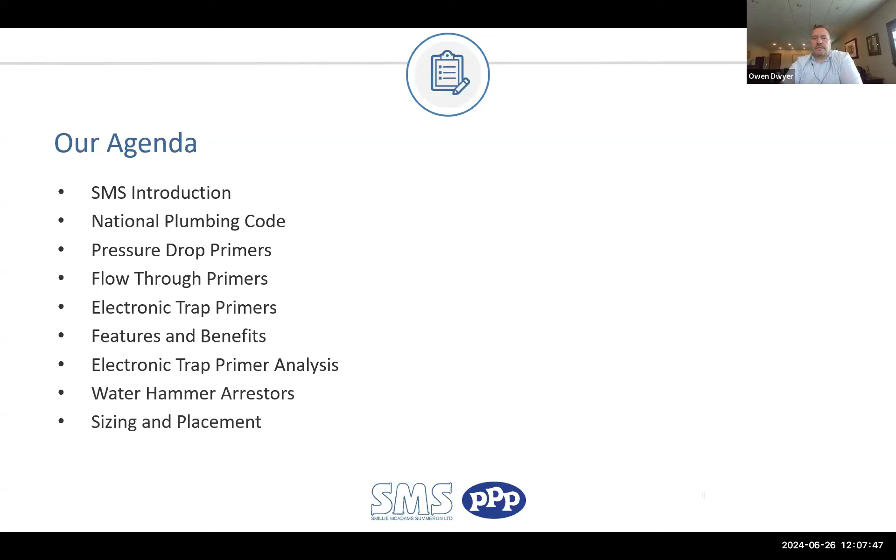All right, so we've talked about the introduction of what SMS does. It's going to be in reference to the national code, because not only do we have people here from Ontario, I'm assuming, Zach, this was opened up to all of your ATS members across the country. So everything is verbatim that I'm talking to. The only difference in references would be Part 7 versus Part 2 in the national. We're going to talk pressure drop, flow through, and electronic trap primers. Quick overview and touching on some of the features and benefits of each. We're going to do an analysis, mainly trying to focus on electronic trap primers versus the older technologies. And then we're going to get into water hammer arrestors, sizing and placement as per PDI recommendations and industry practice, and then a quick summary.

So I won't go too much into SMS. We're unique in the sense that we're set up nationally across Canada with respect to responsibilities for specific manufacturers, IPEX, SHOT, PPP, etc. So we have a unique approach in our market. It's not necessarily commodities, it's focused on ICI, institutional, commercial, and laboratory type of projects.

A quick line card shot. Again, you can see on the left-hand side is predominantly corrosive waste. We do the PPP across Canada, as well as identification systems, valve tagging, access doors, stainless steel drains for food and beverage, dairy, brewery, and as well as modular seals for below grade or sound vibration isolation, etc.

So what does our code say with respect to trap primers? As I mentioned, in the national code it's 2.4.5.5 1). In our provincial code here, it's part 2, part 7. It states: a provision shall be made for maintaining the trap seal of a floor drain by A, the use of a trap seal primer, B, using the drain as a receptacle for an indirectly connected drinking fountain, or C, other equally effective means. On the right-hand side you can see 2.4.5.5 1) - it's verbatim in Ontario.

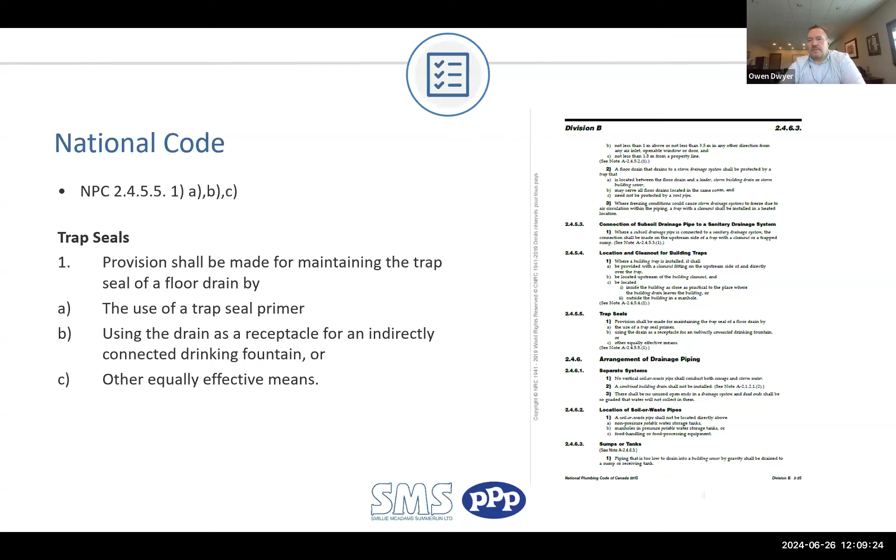So products: you have pressure drop primers, you have electronic trap primers, you have flow-through primers, and other equally effective means. You can see there's the vegetable oil - I'll talk about the vegetable oil in a minute, of which the latter, equally effective means, I'm not a fan of, but we can discuss that.

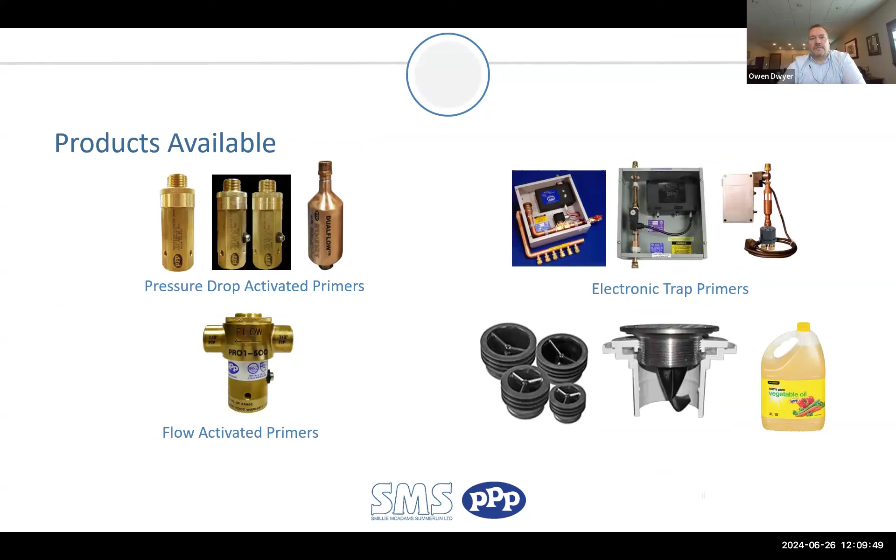I'll just tell you what that is in this next slide. So what are equally effective means? Let's address that first off. You have a trap - so to maintain the trap seal.

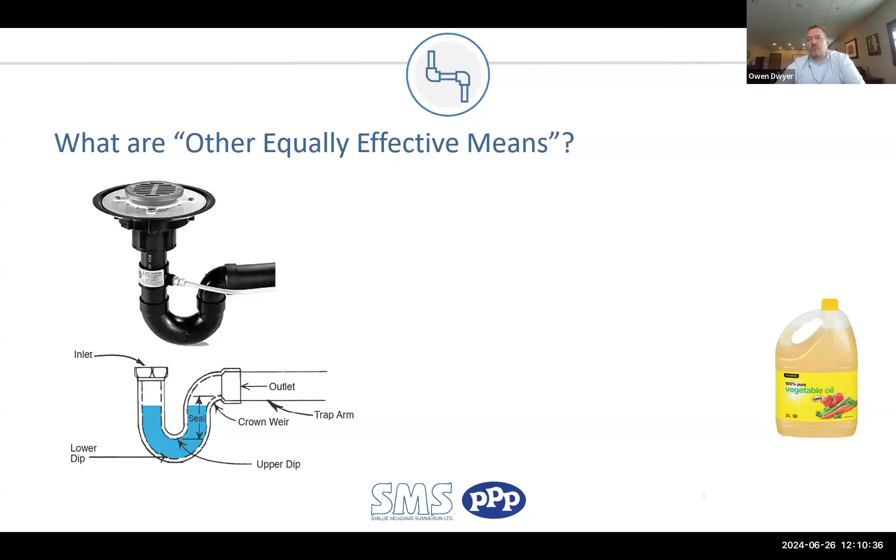As we know, a P-trap, the purpose of a P-trap is to prevent gases, noxious gases from your sewer coming back into the occupied space. And that's done by way of a trap. You have your top crown, your trap arm, and that water - you can see that seal in that image there on the bottom left. That is your trap seal. It is a water seal that's preventing the sewer gases from coming back into the occupied space.

So these devices, as we're all familiar with, you have multiple manufacturers that offer these insert-type seal products. If we're going to be specifying those as a means of trap seal priming or trap sealing, why don't we just eliminate the P-trap altogether? Because we can't - as part of our code, we need the P-trap.

And the reason the P-trap is there, on the bottom left side, is to create a trap of liquid water seal. I don't know if you may know, sometimes in school boards or other facilities where they have a drain that is out in the back 40 somewhere that's very rarely used - that's the old plumber's trick, to pour vegetable oil down the drain, because it's not toxic but at the same time it doesn't have the same rate of evaporation as water. So they would go back, and if they have a stinky drain issue, they just throw some vegetable oil down the drain, and it buys them some time.

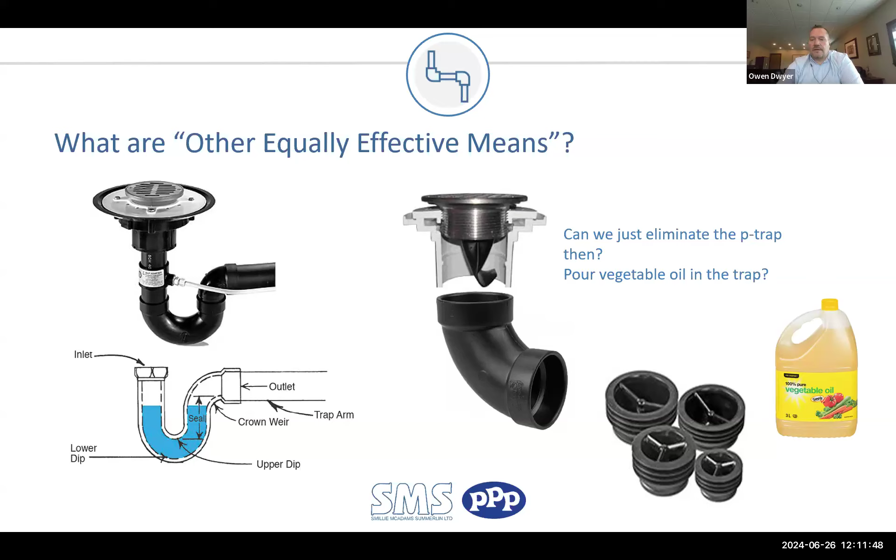So let's talk about the devices first. Pressure drop primers - a pressure drop primer needs exactly that, it needs either a 3 or 10 psi pressure drop in line pressure. Different manufacturers offer as low as 3 psi, I haven't seen anything lower than 3 psi. But when they first came out in the industry, 10 psi was the norm. They've become a little bit more sensitive to that 3 psi pressure drop mark over the years.

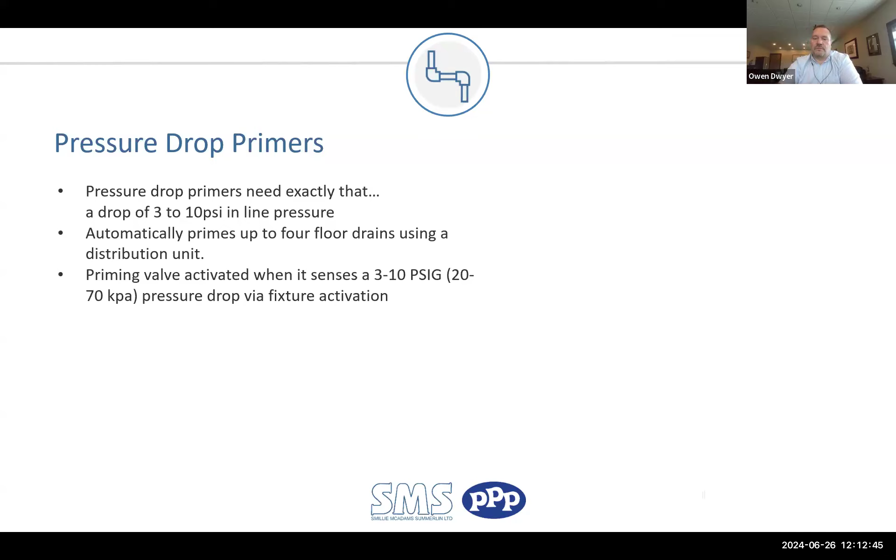Essentially what they do is automatically prime either 1 or up to 4 floor drains using a distribution cup on the bottom. So when it's activated and it senses that 3 to 10 psi pressure drop, it releases a bit of water - sometimes drips, sometimes a solid stream, during that duration of pressure change within that range of 3 to 10 psi. Essentially a valve operates between that 20 to 80 psi range, and typically there's no springs or diaphragms or plastic parts.

They look like this - again, this is a PPP image, but MIFAB, Sioux Chief, there's a whole bunch of manufacturers that look almost identical to that. And their typical installation is depicted there. That comes with most of those devices.

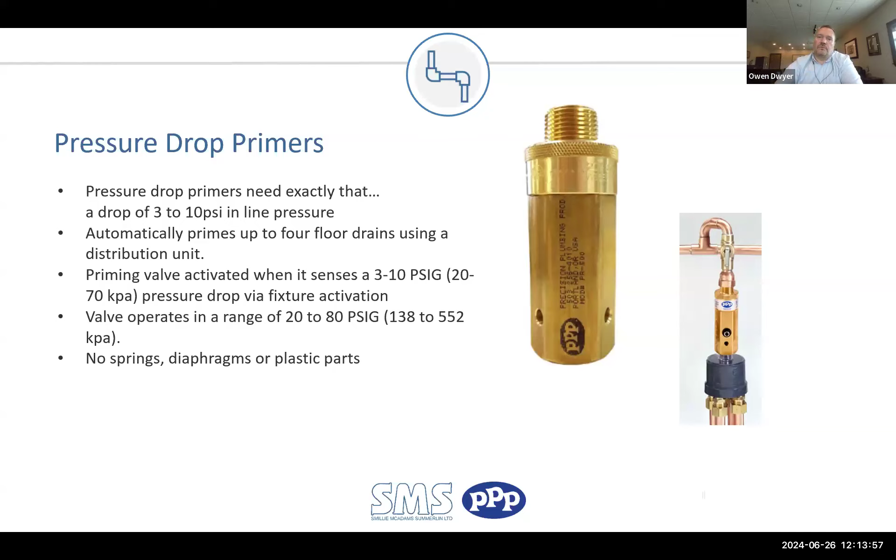That debris loop is an important part of the proper installation of these pressure drop primers. What that's doing is taking off the top of the supply line and 90ing down to a valve. Why? Because the top of that pressure drop primer is a very small orifice that can easily be plugged with any type of debris, something dislodged in the system, be it a buildup of mineral, solder, whatever's floating around in that piping system. If your takeoff is below, it's more apt to become an issue versus taking it off the top.

Just a quick question as we continue on through pressure drop. One thing you mentioned, the 3 to 10 psi drop, the primer is working only during that drop, right? It's not like that drop triggers a set amount of time, correct? Correct. If your static line pressure is 70 psi and an adjacent fixture activates, be it a flush valve and whatnot, as long as, depending on which device is installed, if it goes from 70 to 67 or below, it will activate during that drop in pressure. Same thing for the 10, but the 10 would need to go from 70 to 60 or below to activate properly.

So this is the typical installation as I showed in that picture. You have your device, which is kind of like a piston style, and I don't know what magic happens, but my understanding is there's an O-ring in there that has a seal, and that seal is set to withstand a certain amount of differential pressure between the set line pressure side and the atmospheric side. It basically trickles water past it at that setting. So to get to the 3 psi, think of the analogy of making that gasket or O-ring seal a little thinner versus the 10 psi, which would be a little more robust of an O-ring.

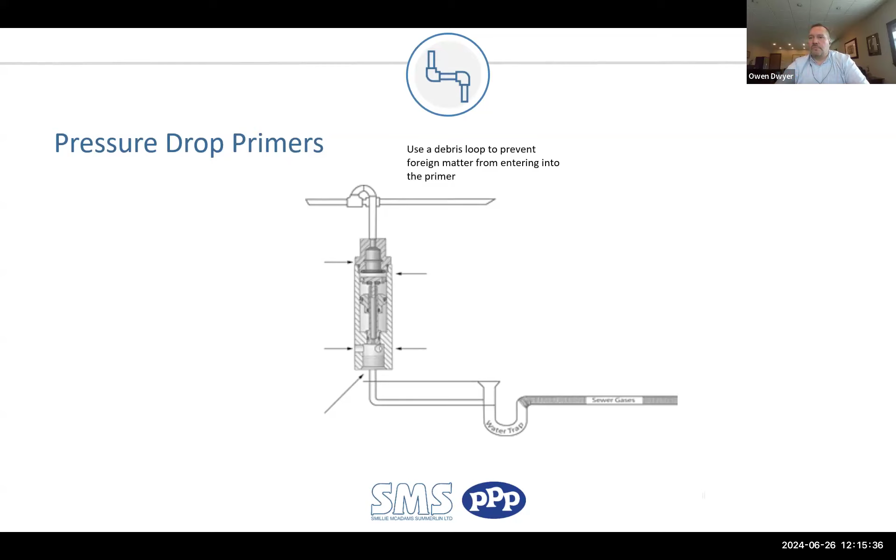So you have your cold water supply, you've got your check valve seal, your vacuum breaker ports, which we'll talk about shortly.

A note worth pointing out here is that the minimum code requirement or manufacturer's recommendation is an elevation of a minimum of 12 inches above the finished floor. You want enough gravity flow to your drain. It can't be right on the floor — there's just not enough head pressure, if you will, to drive that prescribed dosage of water coming out of that unit to reach the drain. Typically, for every 12 inches of elevation above finished floor, you get 20 linear feet of primer piping. So if your drain is 30 feet away, you might want to put that trap primer a minimum of 36 inches... what did I say, 30 feet? So you'd have it 2 feet, 24 inches above your finished grade.

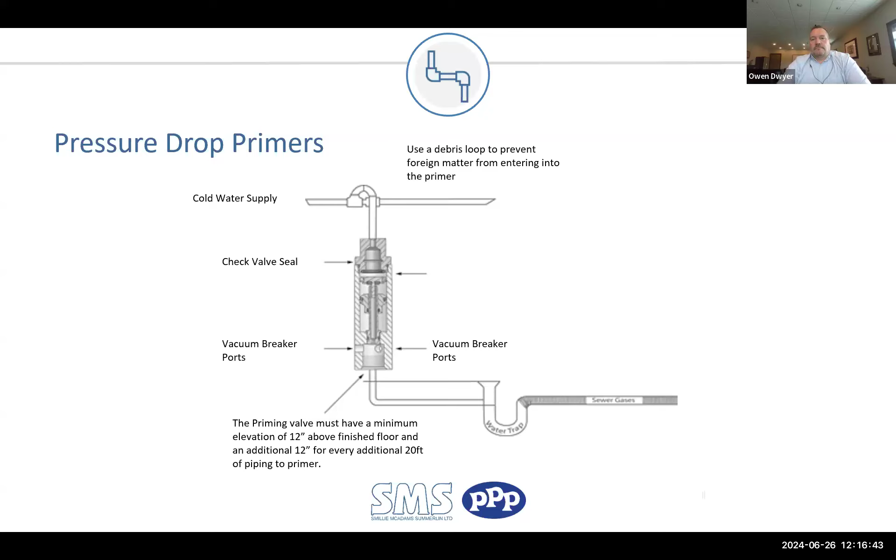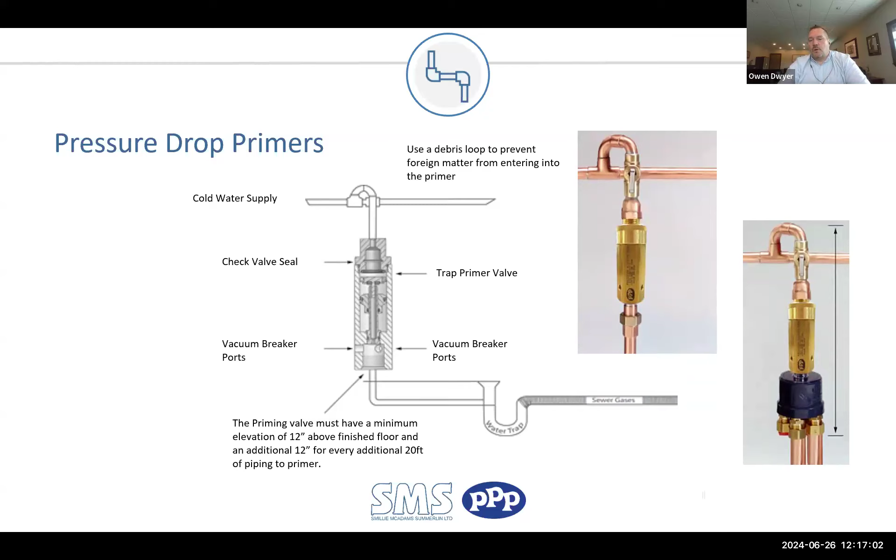Vacuum breaker ports we talked about, and that's the actual priming valve itself that we can see. I'll talk about this installation with or without the distribution cup shortly. As a standalone, without the distribution cup, it's priming one drain. With the distribution cup, you're able to spread that water flow throughout multiple drains.

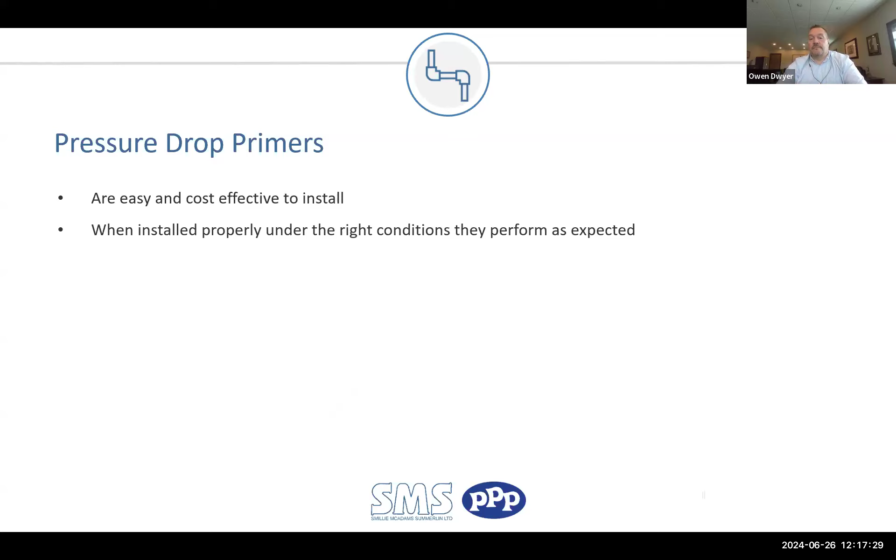Just a quick rundown of advantages: pressure drop primers are easy and cost effective to install. They've been around for a long time, and when installed properly under the right conditions, they perform as expected. There are perfect applications for them, and we'll go through that shortly. But when installed properly under the right conditions, they perform as expected. They can do up to 4 drains, as I mentioned.

However, they are not suitable for low flow fixture or booster pump scenarios because of that 3 to 10 psi pressure range. If it's not seeing a sustained pressure drop for that period of time, it might get down to 3 or 10 psi below static line pressure, but a booster pump kicks in 5 seconds later, and you don't have enough of that sustained pressure drop for the device to activate. So it's not a fault of the device.

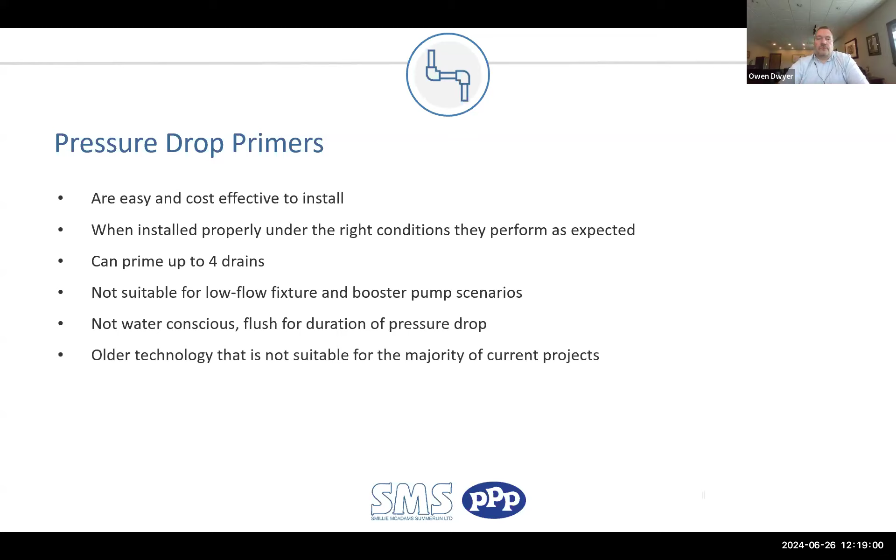They are older technology. Typically, flushing fixtures in the past were not as water conscious as they are today. So based on our water consciousness and today's devices, sometimes these pressure drop primers are not the right choice as a priming device. They're not water conscious, so basically they flush for the duration of that pressure drop. If you have a facility with a lot of usage of those fixture groups — toilets, urinals, labs, etc. — you've already replenished the evaporated water in your P-trap, and everything else is basically water down the drain, if you will. So again, they're older technology that isn't suitable for the majority of current projects, and we'll explain that a little further.

Quick question coming in here - a bit of a unique application, I think. They're wondering whether this could be used in a trench drain area, specifically installed at the high end of a trench drain and activated by the pressure drop at the inlet to the sewer piping.

I would say not a pressure drop primer, because of the amount of prescribed water. If you look at the details from any manufacturer, it's small amounts, in ounces. So if you want to make sure your trench drain is flushed, you might want to go with electronic, which could be set on a prescribed flushing cycle depending on the amount of debris that needs to be flushed down that trench. I would not use a pressure drop primer because there's just not enough flow.

I would think something like an electronic, or even just a solenoid with a DCW, would work a little bit better. Some variation of that is probably more akin to what you're looking for in that application.

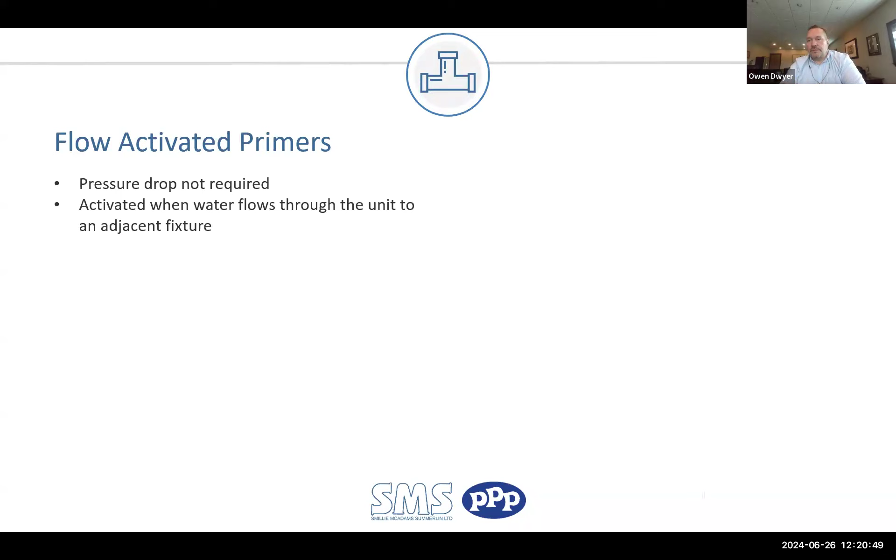It will emit fresh water as long as that fixture is in use. In a school application, if the cold water is left on in that sink, not only do you have it going down the sink, but it'll continuously run in the floor drain as well. Same thing if you have a flush valve that sticks open - not only is it being wasted down the faucet drain, it's also being wasted down that floor drain. So as long as that fixture has cold water flow through it, it will continue to have flow through that primer device.

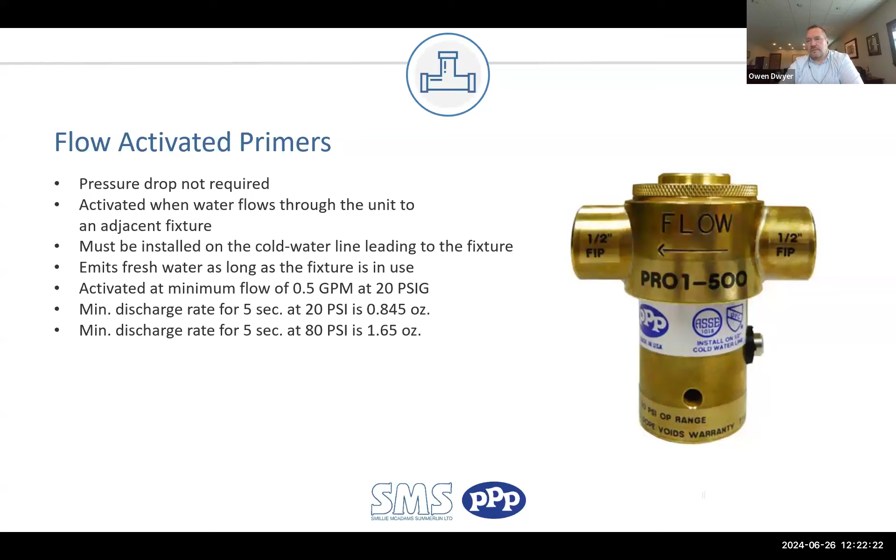They have minimum discharge rates - 5 seconds at 20 psi for 0.845 ounces. So you can see how small a volume of water goes through them for a 5-second cold water activation. And at 80 psi, it's 1.65 ounces. Similar to the previous question about flushing a trench drain, there's just not enough water for 5 seconds of flow being pushed through it - you're only going to get 1.65 ounces of fluid.

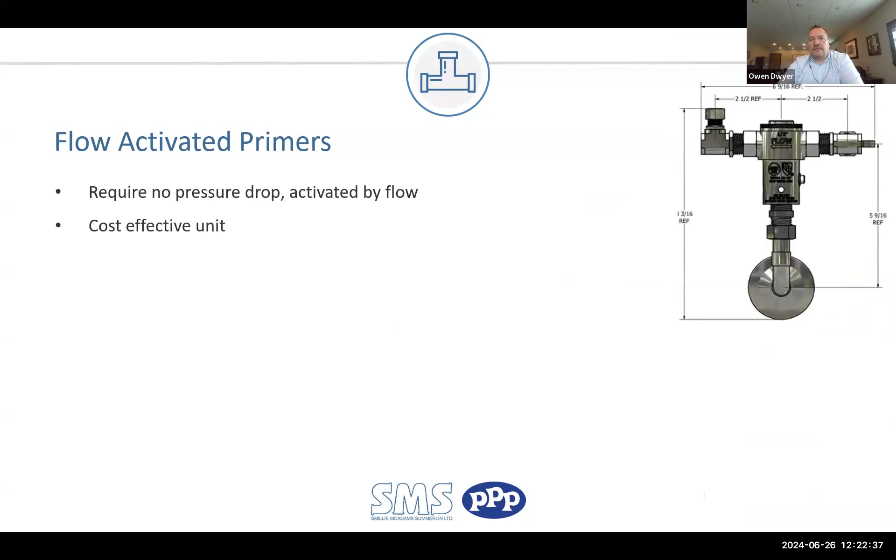As a recap, these aren't rocket science. They don't require pressure drop - they are activated by flow. They are quite cost effective, a little bit more money than the pressure drop primers, but they're not water conscious. Sometimes you can get them in chrome. They can go right underneath the lav in an accessible cabinet area, but that's essentially their use - they're activated every time a fixture downstream of that faucet is used.

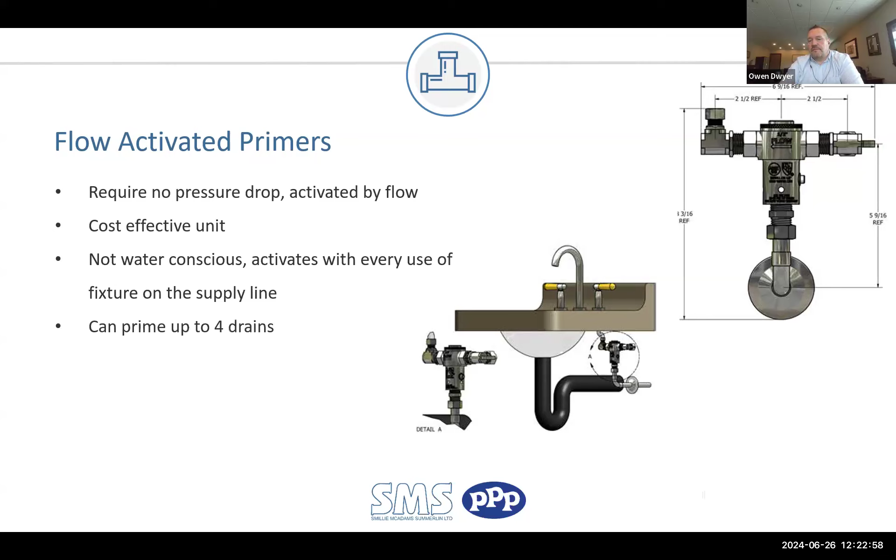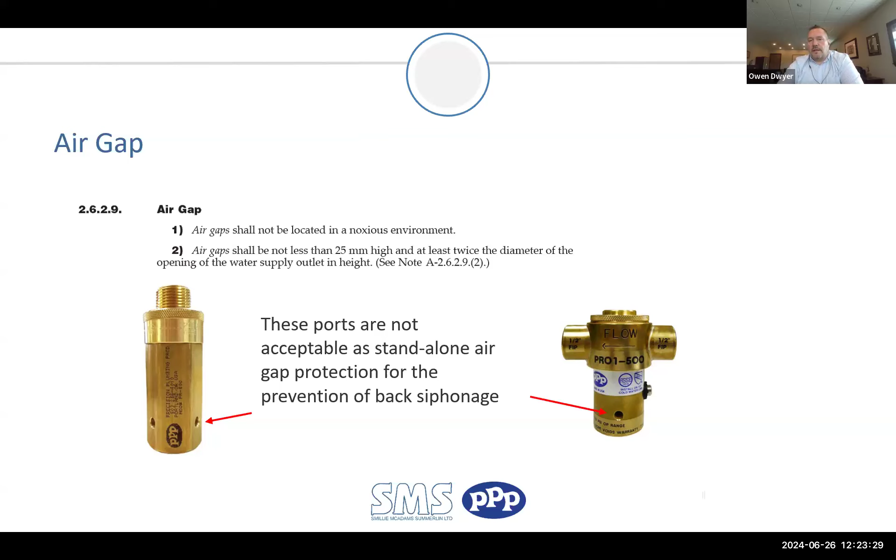So this is going to be talking about back siphonage, and I added this to the presentation I originally submitted because it's important to note that the air gaps provided, or the air holes in Canada, are not a permissible form of back siphonage prevention. These ports are not acceptable as a standalone air gap per our code requirements, so you would have to have an air gap device in conjunction. Sorry, the image is upside down there, my apologies.

So I don't know if that's new news, but just so everyone is aware, that pressure drop primer or flow-through primer, whenever you see those little ports on the side, they are intended for back siphonage prevention, but they are not code compliant for back siphonage prevention. They do not fit the definition of an air gap as far as back siphonage.

So going on to the third, so we covered. One quick question there: is that something that's commonly an option on one of those flow activated or pressure drop activated trap seal primers? Or is that something that a contractor is going to get from, say, the pipe manufacturer or something like that?

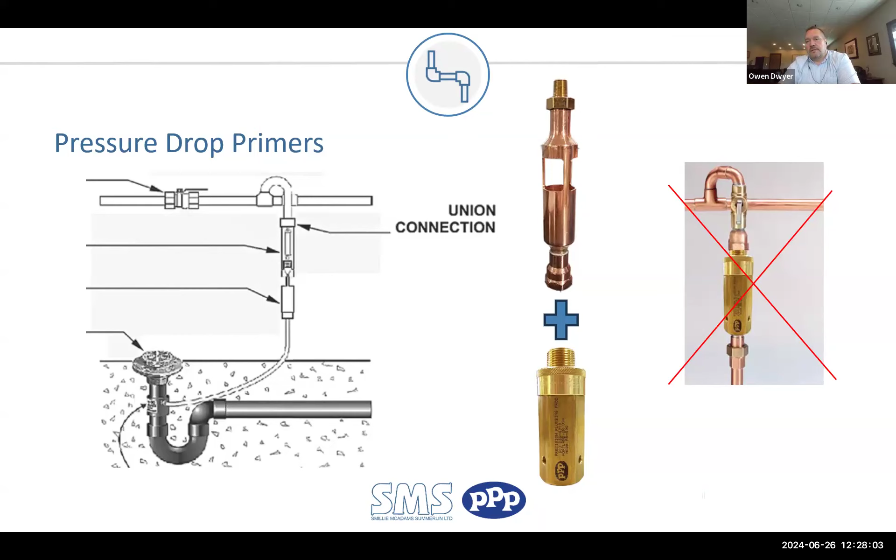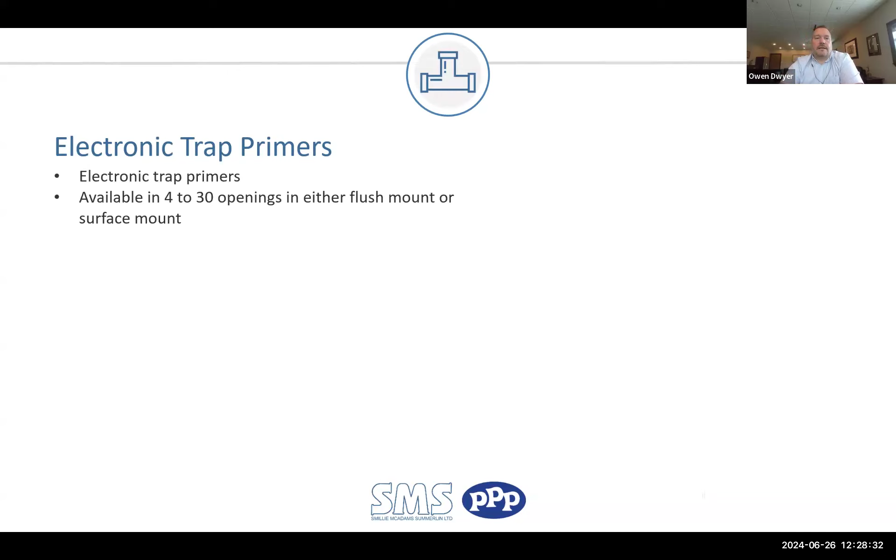So moving on into electronic trap primers. Electronic trap primers are exactly that. They use power, be it 120 volt, 12 volt, or 24 VAC. They can do up to multiple drains, up to 4 to 30 is typical. I have never seen a manufacturer do more than 30, either surface mounted on the wall or recessed into the wall.

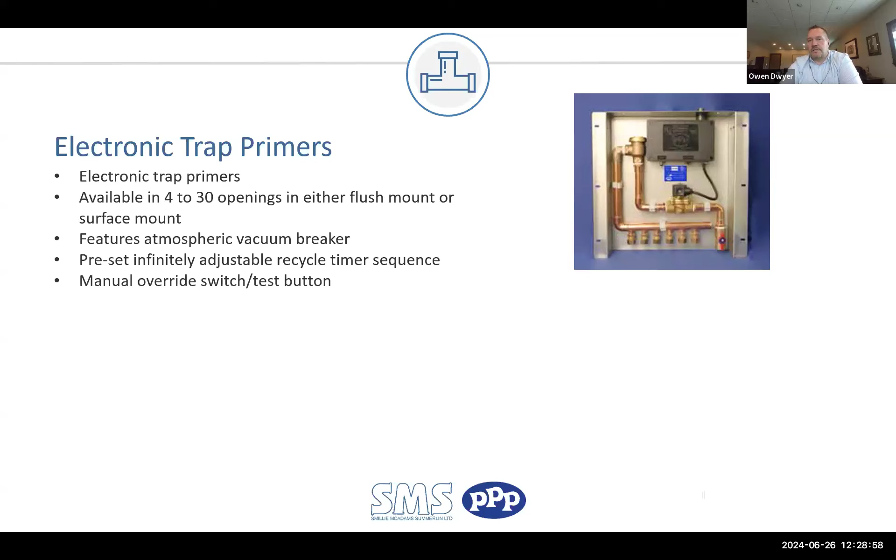All of them feature an atmospheric vacuum breaker, which we'll touch on shortly. A preset, infinitely adjustable recycle timer is what you're looking for. Not all electronic trap primers are created equal. They should have a manual override or a test button just to make sure that the device and the solenoid are acting properly. Again, as I mentioned, various voltage, whether it's 120, 220, whether you have a battery operated unit at 12 volts or a BAS system that's operating at 24 VAC.

They are calibrated manifolds. So typically you have water that's coming in and it's not a full port, because your first drain is going to see the predominant volume flow, second drain less, third drain even less, et cetera. So these manifolds are calibrated, they're not full port. If you ever tip one of those manifolds upside down and looked in, they have an orifice inside the outlet to accommodate an equal flow distribution through those manifolds.

Typical outlets are either 5/8 or half-inch compression. That would be the difference between either a rigid copper, soft copper, or poly tubing on the half-inch OD compression, which is typically 3/8 tubing. So before I get to the next point, there's also now, because of popular demand, half-inch PEX and half-inch PEX F1960 or Pro PEX connections in lieu of the half-inch or 5/8 compression.

Pricing typically doesn't change. It's just a matter of the contractor ordering at that time what the connection type is.

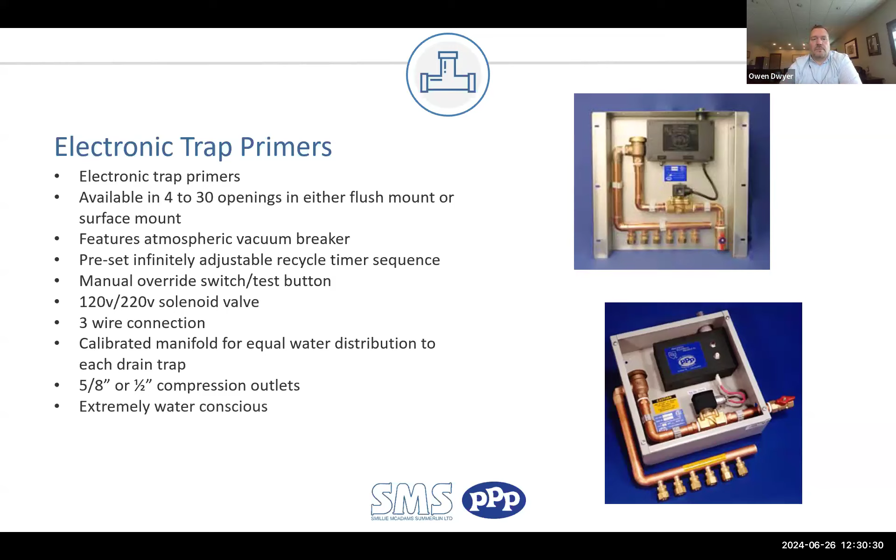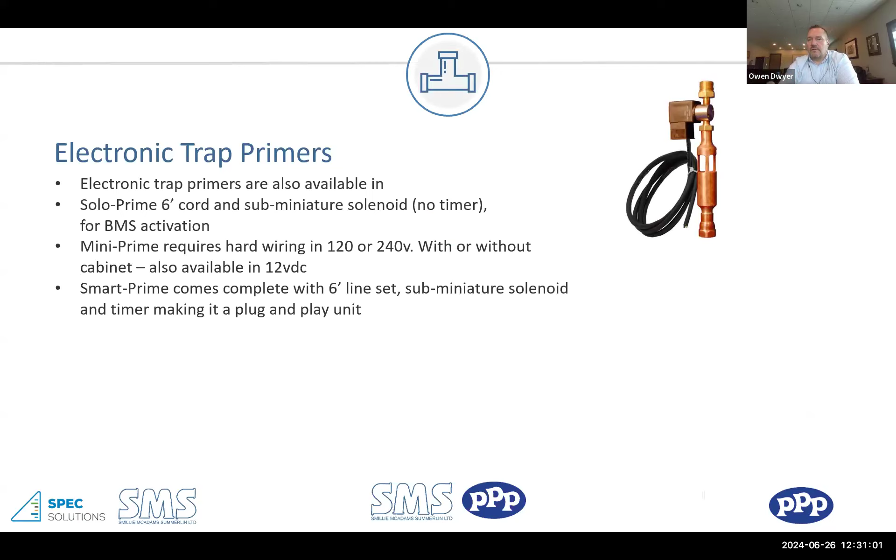Electronic trap primers are extremely water conscious. We'll go through that in detail shortly. Electronic trap primers are also available, again these are trade names from PPP, but other manufacturers have similar ones. So instead of a cabinet, these are kind of like plug and play or hardwired units. Some have no timers and require activation through a BAS. So there are multiple variations of electronic trap primers, some with little sub-miniature solenoids, and some requiring BAS activation, with or without boxes and cabinets, etc.

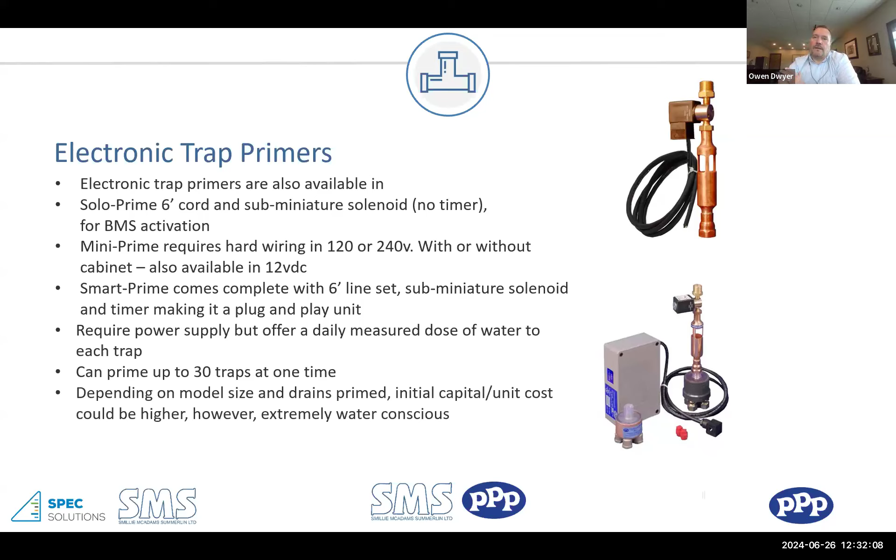These can do up to 30 drains in one prescribed dosage or activation. Depending on model size and number of drains primed, the initial capital cost looks higher because you've got more bells and whistles, solenoids, electronic components, etc. But in the end, extreme water conservation is key for these units.

So just a little preamble on this - I'm making a joke here. This is a highly scientific pressure drop to electronic trap primer comparison.

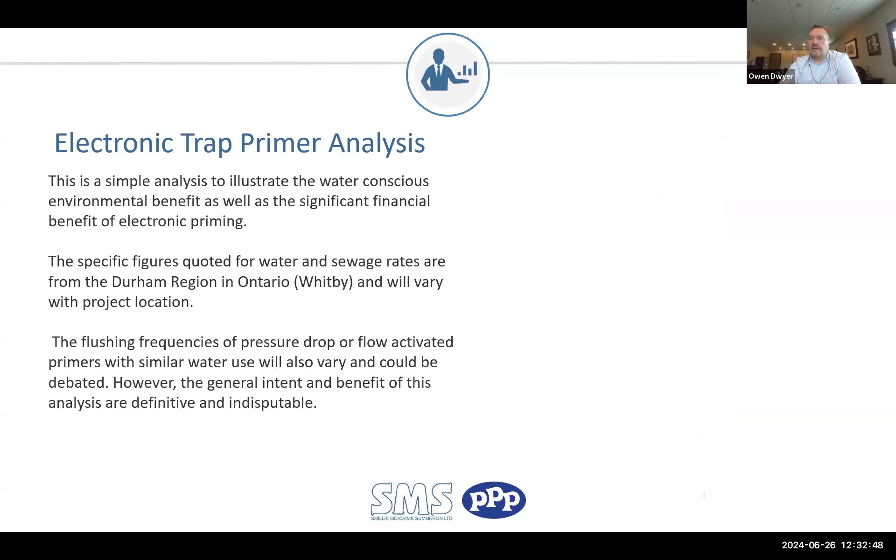So what we did: we took a scenario using our region of Durham, where our office is in Ontario. We took our bulk water consumption rates and the flushing frequency of a pressure drop or flow activated primer with similar use. The general intent is just to illustrate the benefits of an electronic trap primer over pressure drop or flow through.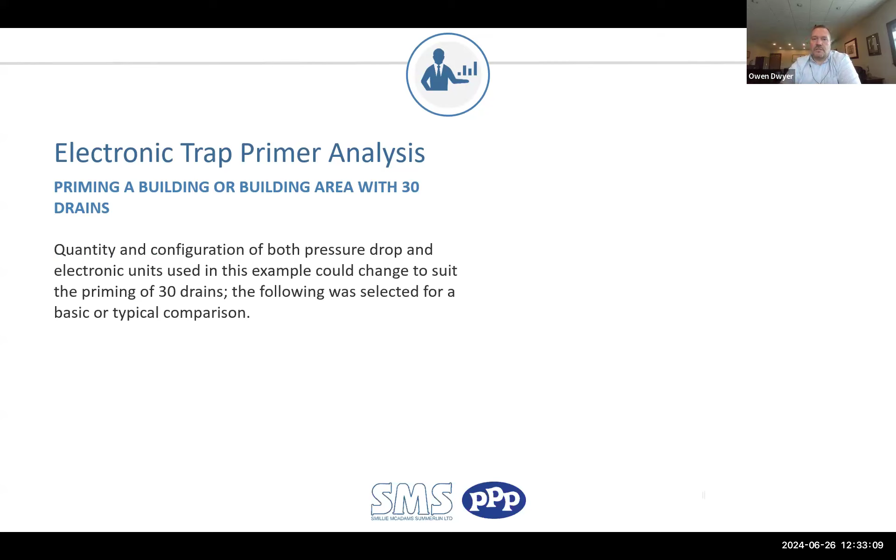So in general, we have a building that requires priming of 30 drains. The quantity and configuration of both pressure drop and electronic primers were selected to suit that scenario. Just take a plan - here's where your drains are for a basic typical comparison.

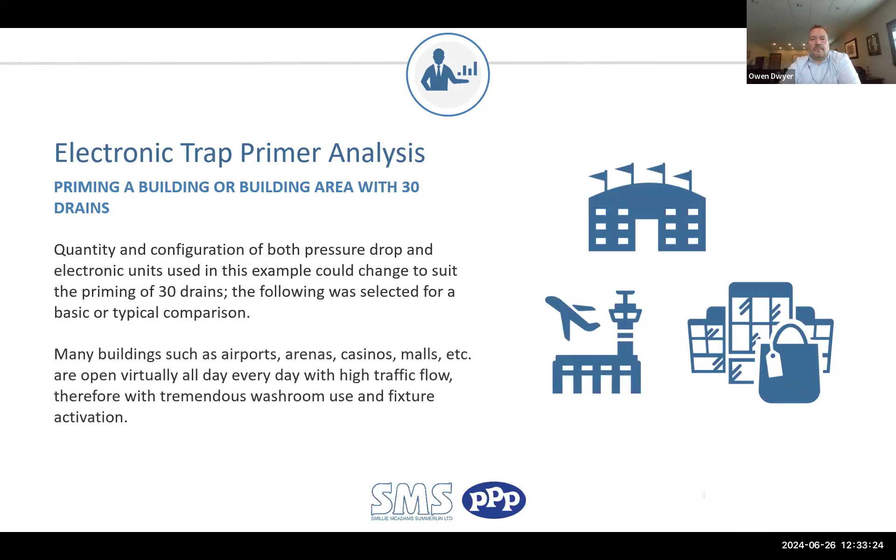So in that, we're going to take a high volume of flow. We're going to take airports, an arena, a casino, a mall - somewhere with high fixture usage, and basically tremendous washroom usage and activation.

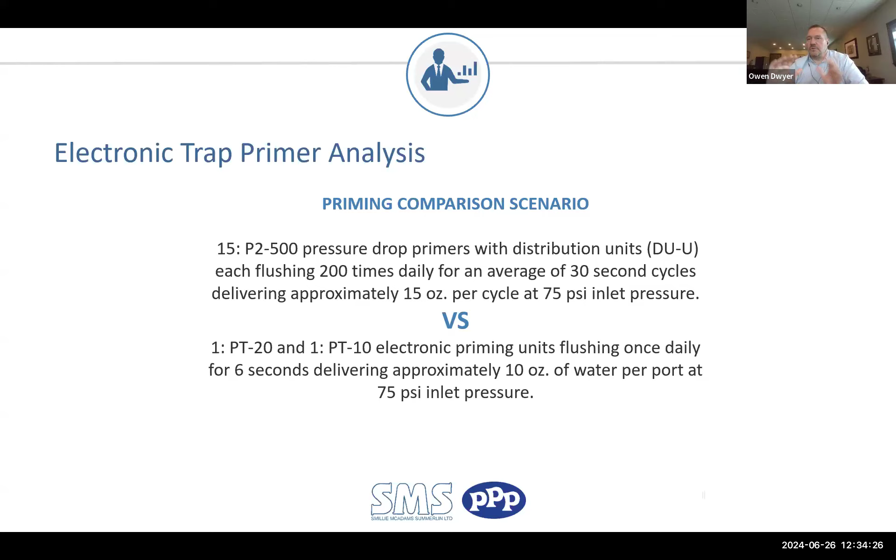Versus electronic - now we've selected one 20-outlet station and one 10-outlet station in different parts of the building to accommodate those 30 drains. These are electronically activated solenoids with factory settings, typically 6 seconds to deliver approximately 10 ounces of water per port at 75 psi. So again, all parameters equal.

When you start to look at your water consumption, this is where the eyes should get opened. So 15 pressure drop primers that deliver 15 ounces per cycle, 200 cycles per day, every day of the year - again, this is just picking an extreme type of scenario - that is 16,425,000 ounces, divided by 160 to get gallons, so about 102,000 gallons a year to prime floor drains. I know this is an extreme scenario, but it's just for visualization purposes.

So again, going back to our first block water rate usage here in Durham for cubic meters: for the first 1,000 gallons is $4.29, and the average sewer rate is $1.60 per cubic meter at first block rate. Annual sewer and water consumption for this facility would equate to about $1,200 in water usage for drains - essentially water down the drain to keep these trap primers functioning properly.

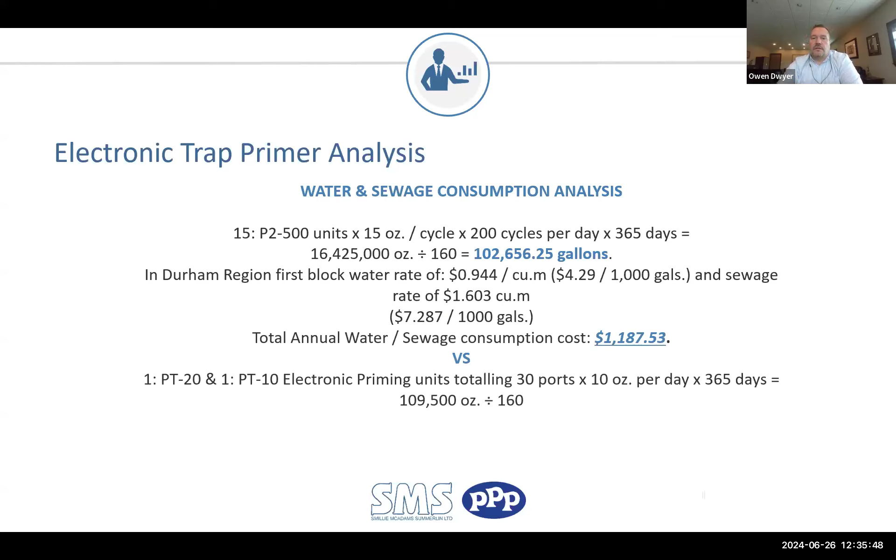Versus you have a 20 and a 10 electronic trap primer, 30 ports, 10 ounces per day, 365 days a year. You have 109,500 ounces divided by 160, giving you approximately 684 gallons per year. So its total annual water sewage consumption is $7.92. These have increased since I did these calculations a few years back.

But again, it's just a matter of visualizing the benefits of electronic trap primers over pressure drop, because every time there's a pressure drop, if they're installed in the right environment, every time there's a pressure drop or flow through, there's a prescribed amount of water. Whereas electronic is once a day for a set period of time. Again, just as a standalone cost comparison on water consumption, it's worth noting.

That volume always throws me for a loop - like the amount of water that goes into activating those flow through or pressure drop activated units, because it's every flush valve activation, right? Every time the flush valve drops the pressure enough to activate the pressure cycle. Correct, yeah, it's a wild amount of water. And I would imagine, since you put these calculations together, over the last handful of years those numbers are higher. Yeah, not those numbers are higher for sure. But again, the ratio would be the same.

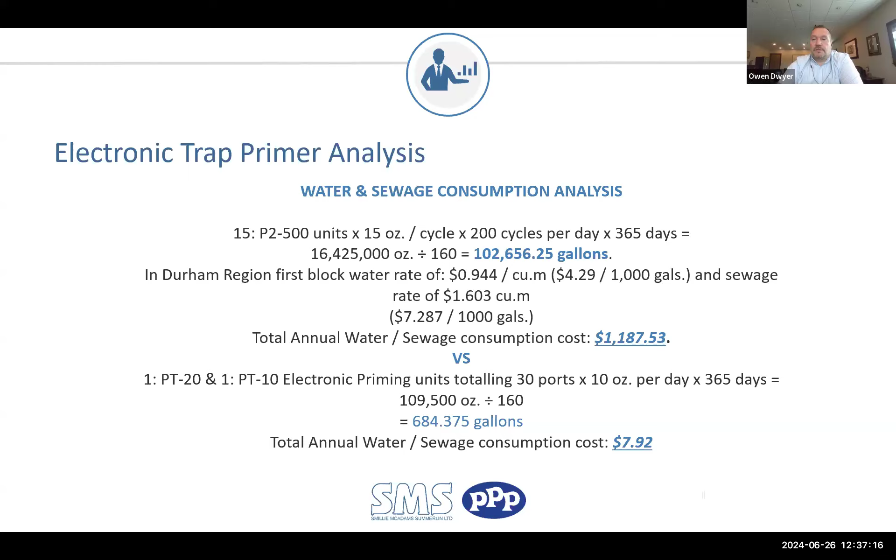So regardless of the cost of the water consumption, the ratio would be comparable. So just a quick capital approximate cost analysis. Again, these prices have changed, but again, it's for kind of analyzing if you're going to sit there and look at cost comparisons.

So 15 of those pressure drop primers, let's call it $965 for a wholesaler or contractor. Distribution units, you're going to need 15 of those as well. 15 labor units at $80, 2 hours per install because you're sweating in if you're doing it all properly. So you've got a total install cost of $3,852.

The cost of a PT10. So again, you have initial sticker shock from a lot of people, $1,100. It's going to take about 3 hours to install that. And then you've got a PT20, it's $1,309, and it's going to take approximately 4 hours to install that. And then you have to take into account the different trade for running the electrical.

And again, this is not something that we made up. We had a contractor do this analysis with us to give us some fair results. So as you can see, the installed cost for the material itself as well and the labor to install them, even if it was negligible, the cost and water savings should be the selling factor.

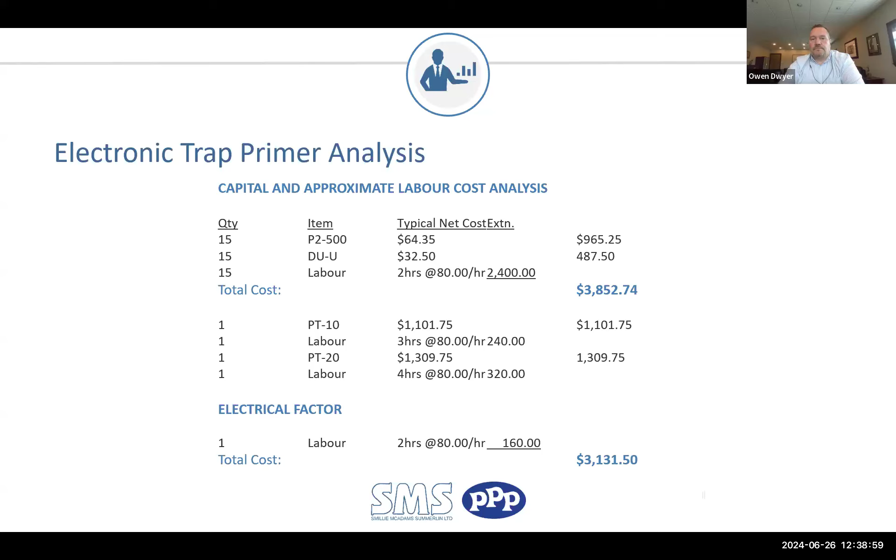But a lot of times there's people, they get a sticker shock because, okay, it's going to cost me $2,400 for these electronic units, but it's only going to cost me half of that for doing a pressure drop. But by the time you actually install them, it's cheaper to go electronic.

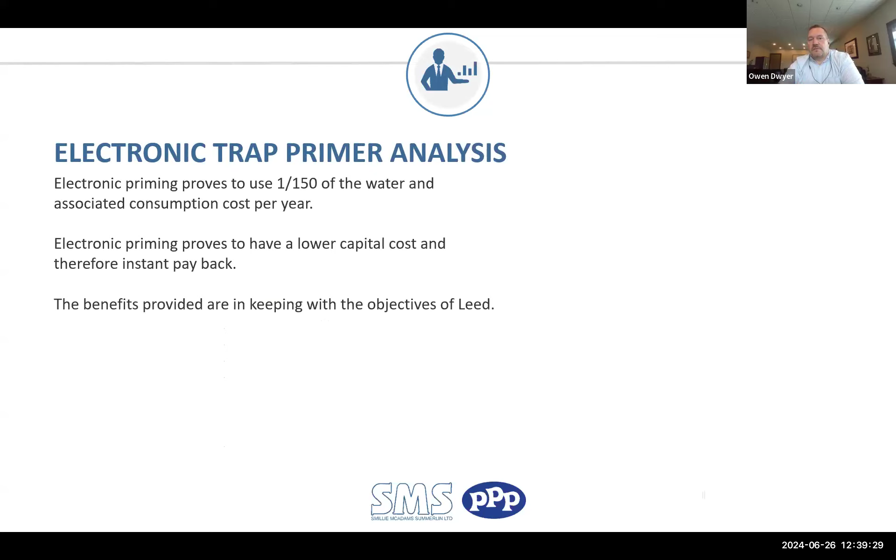So in our analysis, electronic priming proves to be 1/150th of the water and associated consumption costs per year. And electronic priming proves to be a lower overall capital cost and instant payback, even if those were a wash. And there is no instant payback. The payback is coming in the water conservation, the benefits of providing and keeping with the objectives of LEED.

And we recommend specifying electronic trap priming to the maximum extent possible for multiple factors. One, water conservation. Two, low flow. A lot of days today we have low flow faucets, low flow everything, and we're trying to conserve water. And then you have a facility that has not only low flow devices, but then they add booster pumps. So all of those factors work against flow activated, especially pressure drop primers.

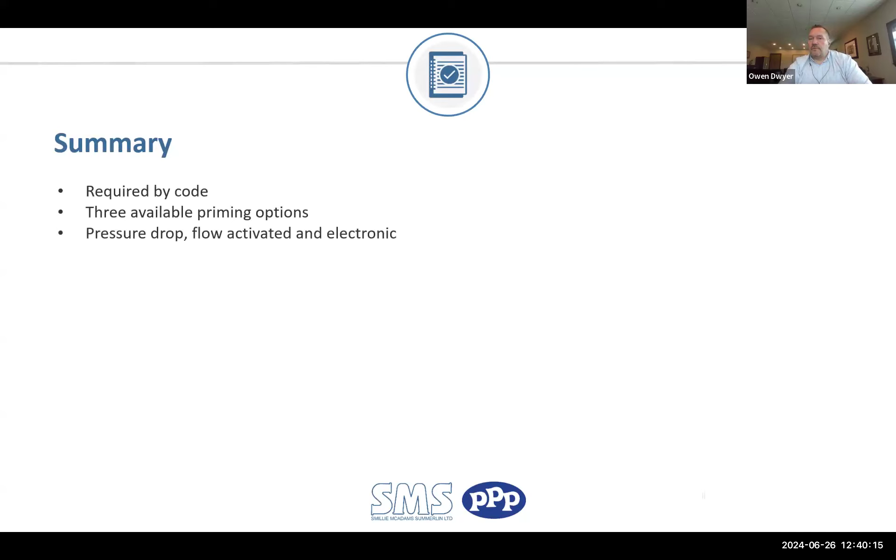So in summary, you have to seal that P-trap that's in the drain and that floor drain. You have three available options, either your pressure drop, flow activated, or electronic. It's good engineering practice that you shouldn't rely on other equally effective means, as I mentioned. No, you don't want to have somebody install that device and that device gets blocked or removed, or you don't want to have somebody going to put vegetable oil down the drain.

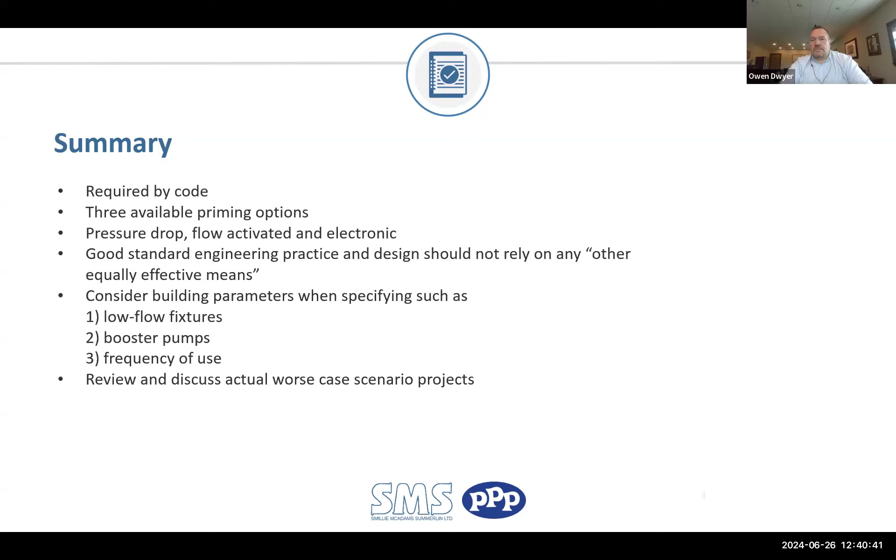Take into consideration your low flow, booster pumps, frequency of use, etc., and review and discuss actual worst case scenario projects like we just went through. So I'm going to jump into, and this was one of those kind of pay now or pay later scenarios. So a lot of times if a building owner is looking, wow, a contractor submitted this, it's going to cost me $1,200 to put in pressure drop primers. Why are we specifying electronic?

You could say, well, pay now or pay later. So what you're going to be doing is you're going to be paying quite a substantial amount more in your water and sewer consumption, Mr. Building Owner, going that route.

Yeah, and while you get over to that other part for the water hammer arrestors, a couple of questions coming in. Sure. One, I guess maybe you can comment briefly. I know we kind of talked about it in terms of low flow world and low flow fixtures affecting the choice of priming. Right. I would mention that historically there had been almost a direct connection to the vacuum breaker tube, so that when you flush the toilet, there would be an amount of water that's going down that tube and lead to your trap.

Right. With the low flow world and the fixtures that we're in, that sort of method worked okay when we were doing 3.5 gallons. When 1.6 gallons per flush was your low flow, that was okay. We had an allowable amount of water that we could divert and not affect the performance of the fixture.

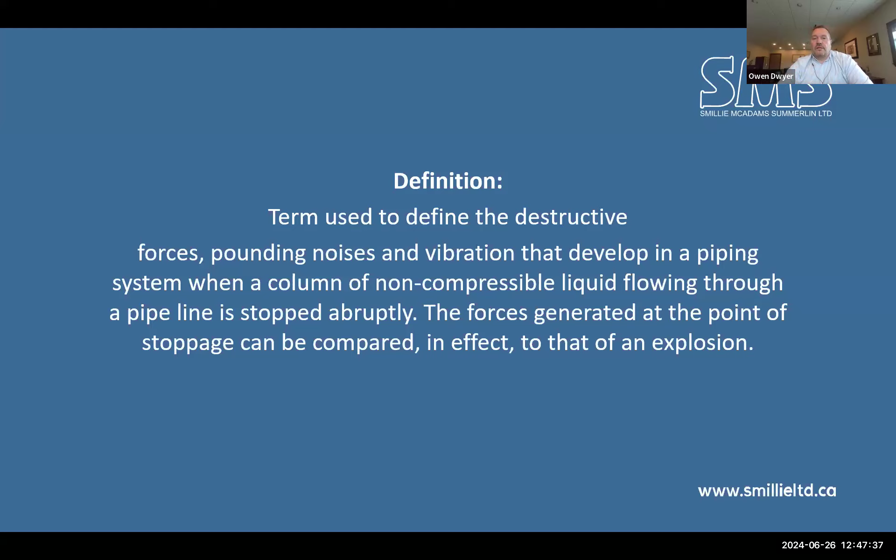So by definition, the term is used to define the destructive forces, pounding noises, vibration, anything that develops in a piping system where a column of non-compressible liquid is flowing through a pipeline and stopped abruptly. So how that happens is solenoids, opening and closing of valves, et cetera. So those forces have been known to generate upwards of explosive potentials. We're going to go through that a little bit, but the forces generated at the point of stoppage can be compared in effect, as I mentioned, to that of an explosion. So water hammer arrestors are needed for this reason.

Water hammer occurs when a high intensity pressure wave travels back through the piping system until it reaches the point of relief, such as a larger diameter of pipe, the riser, etc. That shock wave will then surge back and forth between those two pipe reliefs and the point of impact until that destructive energy has been dissipated or absorbed. That violent action accounts for the piping noise and vibration, and the faster the water flows through the system, the more intense that water hammer or that noise will be. So we're increasing the possibility of damage.

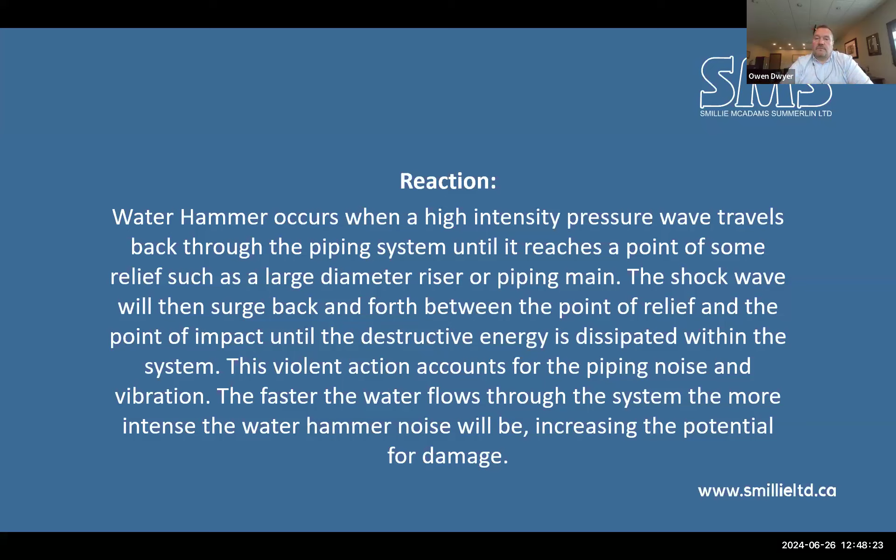So just a kind of line drawing of what's happening. So you have a closed system, water is static, opens abruptly, that water is now flowing, and then again it closes abruptly, and then you have that sudden shock. So that shock goes not only forward, but now you have it coming back on itself, and those two flow joints, that conjuncture, is where you get that energy.

So the absence of noise, it's important to note, does not indicate that the water hammer or that shock doesn't exist in that distribution system. Sometimes it's mitigated by the material of the water supply, like PEX piping, for example. If the piping has the ability to move, it might absorb that shock, whereas a more rigid piping system won't.

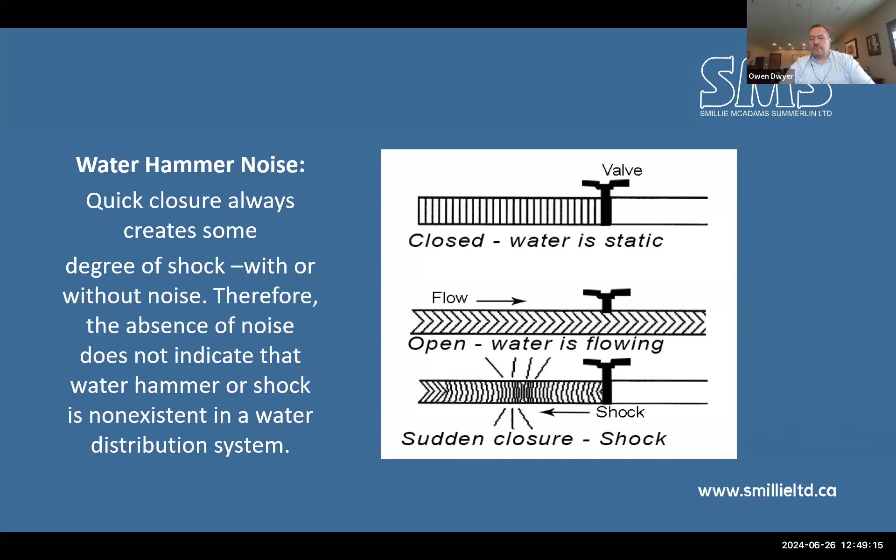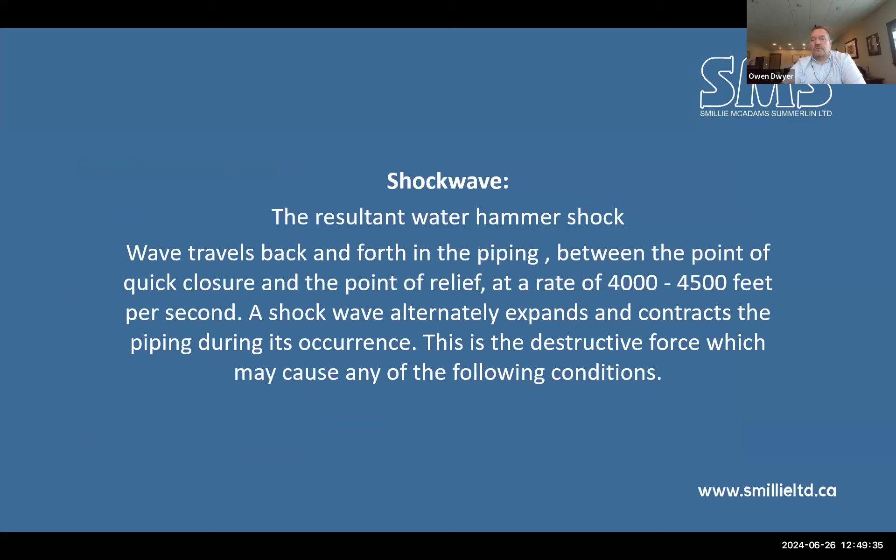So the resultant water hammer shock travels back and forth in the piping, as I mentioned, between the points of quick closure and the point of relief at a rate of 4,000 to 4,500 feet per second. So that shock wave alternately expands and contracts that piping during this occurrence, and that destructive force can cause the following conditions. Obviously, ruptured pipe, leaks, leaking connections. It can weaken those connections if you've got a thread-to-thread connection, or a mechanical joint between dissimilar materials. Again, as we're all aware, there's vibration and noise, damage to those valves. Again, damage to all kinds of valves, meters, gauges, any kind of recording apparatus that has a maximum PSI requirement.

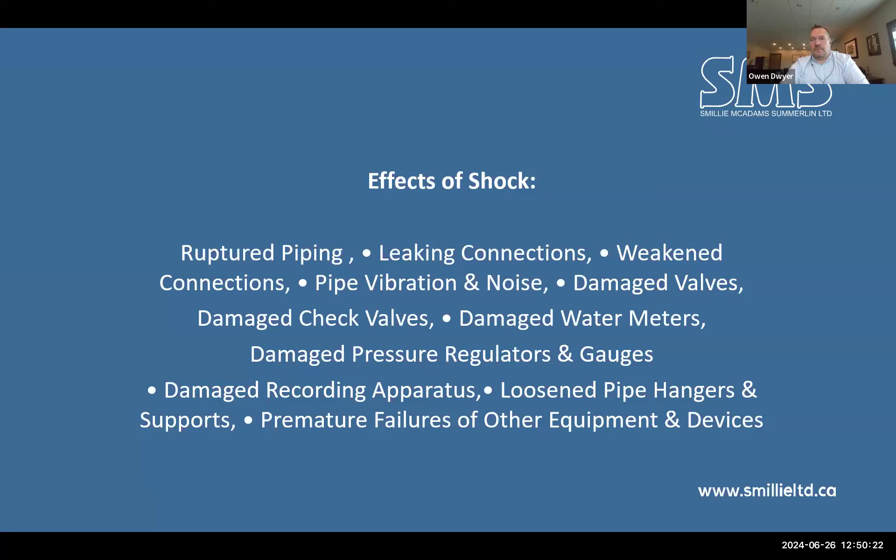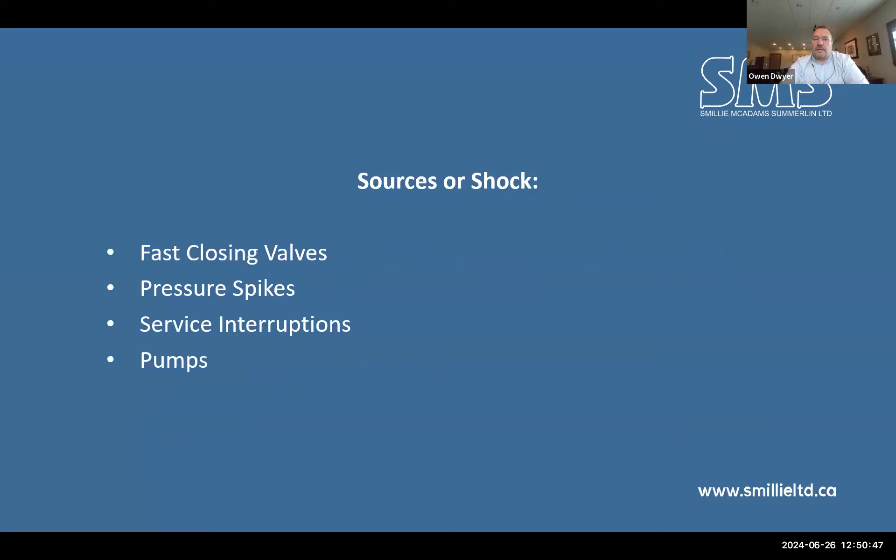So the means of control, water hammer arrestors. So you're trying to include a device in your system that acts as a shock absorber, if you will, for that shock that's being generated by that fast closing device. So PPP, it's their SC series. Other manufacturers have their different series, but essentially what you have is this.

It's an air chamber. So old school shower valves, for example, used to have two pieces of pipe extended with caps on the top, and those, as you fill your system, would be the homemade water hammer arrestors because it had this column of air. And as we know, air is compressible, fluid isn't. That is the principle behind these, where you have a trapped volume of air in those devices.

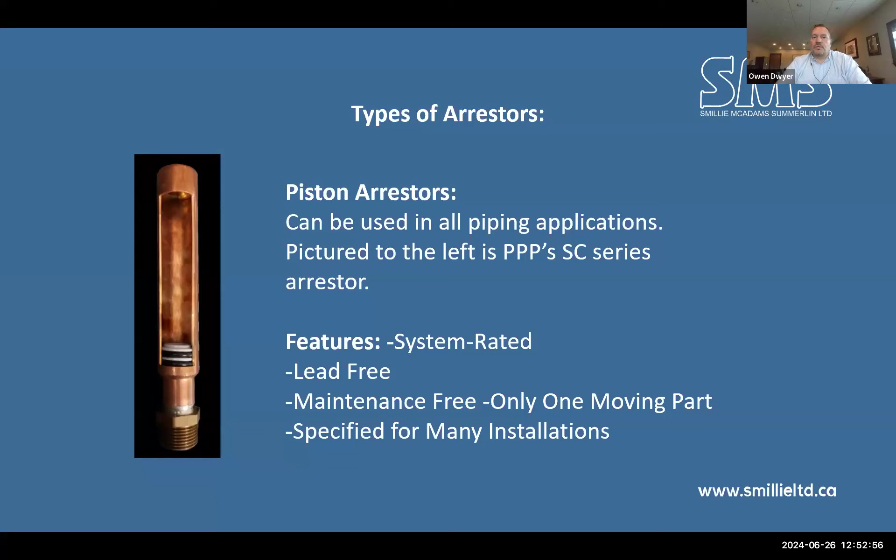And there's different types, but to go back to the analogy of the PEX or the copper lines at the shower valve, what happens over time is air is reabsorbed into that water system, and eventually your tubes become full of water anyways. There's no longer any air because the air will redissolve. These systems are separate. However, if you do have a piston style arrestor like this that is subjected to above and beyond its prescribed pressure, you might have that air leaking out and rendering your device useless if it hasn't been protected during initial startup, or if that pressure has exceeded its capacity.

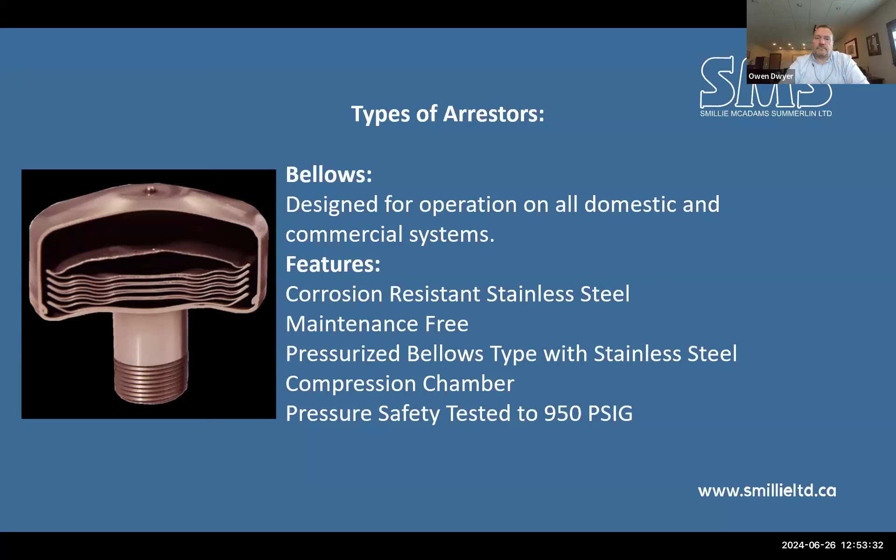So during design and construction, water hammer arrestors must have the capacity to control the shock adequately. So undersized ones are going to underperform. They're not going to have enough capacity to manage. So the construction must be of a quality that will enable the unit to provide many years of dependable service.

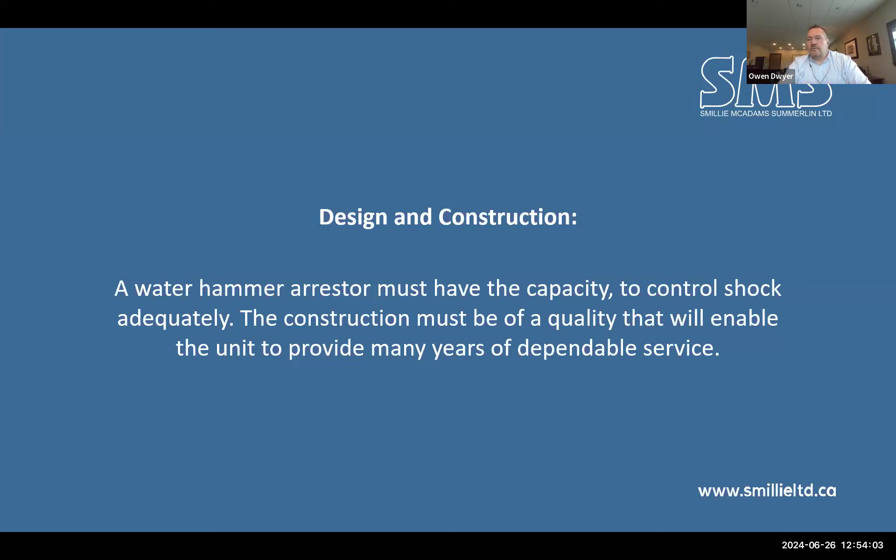That's the analogy that I talked about. Instead of putting a T in with two pipes going up, that's not the way we want to design water hammer arrestors into a system. As I mentioned again, they're just going to become full of water at some point in their installed life.

So over the years, there's been a standardization through members of the Plumbing and Drainage Institute, PDI. They set forth the standard method for sizing and placement. So again, this is not something that I'm coming up with. It's in manuals, the PDI manuals.

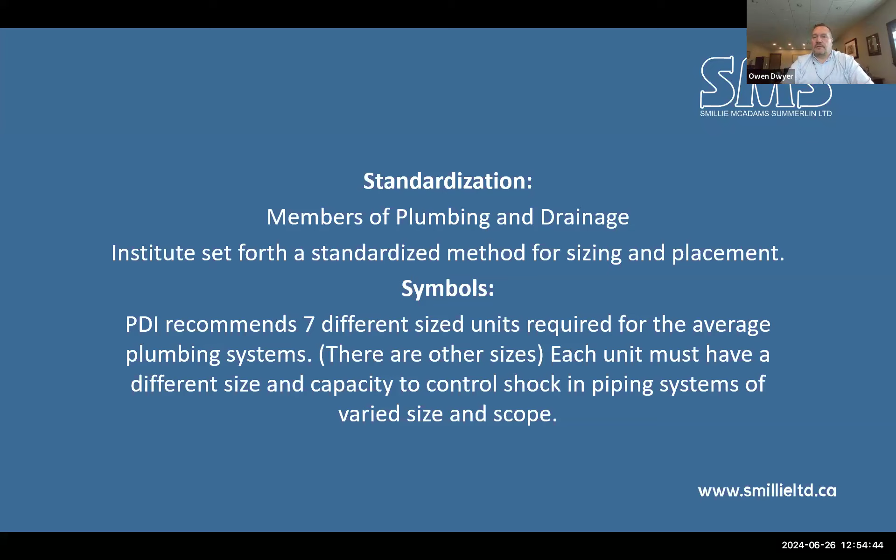PDI recommends 7 different size units for the average plumbing system. There are other sizes, but each unit must have a different size and capacity to control the shock in the piping system of varying sizes and scopes. So as I mentioned at the onset, this is not a carte blanche coverage of all scenarios. This is more of a concept type of presentation.

How are we doing for time?

All right. So in the PDI manual, there'll be a list of symbols that denote the range of sizing for water hammer arrestors. So there's either A's or the double A's, etc. But this is essentially what you have: your pipe size and the number of fixture units that it can effectively absorb or take care of. So the cross reference to the PDI is an A, for example, would be your 1/2 inch sizes up to 11 fixture units. 3/4 inch pipe size will do up to 32 fixture units, and that would have a designation of B, or part number -B, or a part number -A, etc.

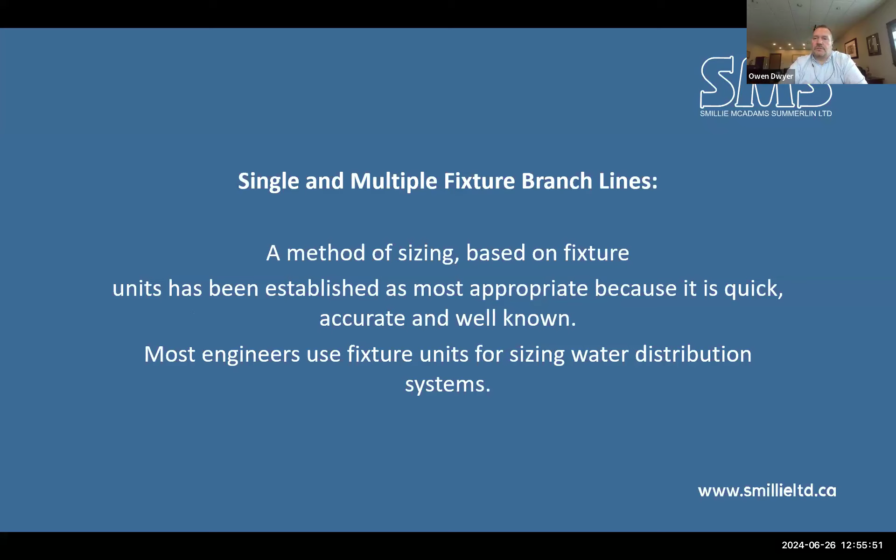So single and multiple fixture branch lines is what we're going to talk about here. They have to be handled differently. The method of sizing is based on fixture units. So we're all familiar with fixture units. It's a quick and relatively accurate and well-known way of dealing with not only water distribution sizing, but also in conjunction with water hammer arrestors as well.

So I'm not going to talk about the definition of a fixture unit, and we're going to talk about the difference between public and private. So for obvious reasons, in our charts, in our code, there are 2 different fixture unit counts. One is for public and one is for private, and that's just based on accessibility, how many people are going to be using these devices, etc., in a given day.

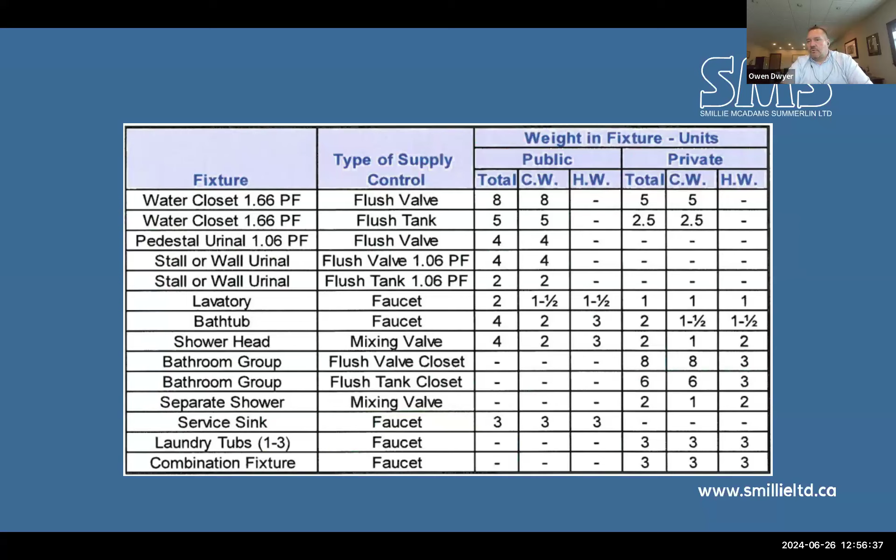You might be familiar with these charts. These are your fixture unit charts. You have your public and your private, your cold water and your hot water lines, etc. So I'm going to be referencing these similar charts as we go through. But again, this is in all of our code and PDI manuals, etc., when it comes to fixture units.

Here's the meat and potatoes. So sizing and placement. You're calculating your cold water and your hot water fixture units. When you come up with your cold water fixture units, in this example, you've got 2 water closets and 4 lavs. Each water closet is going to have their fixture unit count from the previous chart. Lavs are going to have a fixture unit based on their previous chart. Come up with your total fixture unit count for the cold water line: you have a total of 22 fixture units.

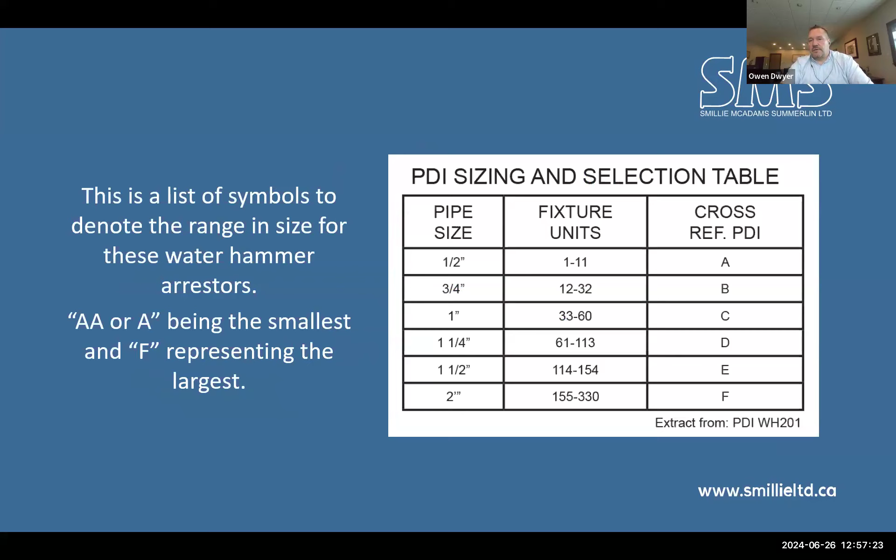So if I zip back real quick, 22 fixture units, you're going to size a B size, PDI sized B water hammer device to handle that scenario. So that is multiple lines. So you have one for your A, your cold water, one for your B, which is your cold water, and then you have your hot water side. You only have the 4 lavs, 6 fixture units. That's the smallest one, which is the size A.

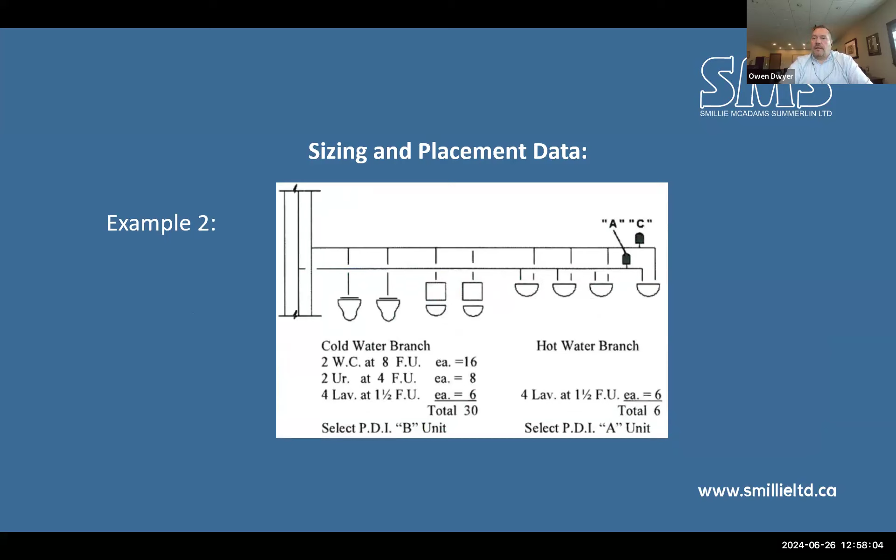Example 2, sizing and placement. We've got again something where you've got water closets, urinals, and lavs. You've done your cold water calculation fixture units. You're going to go to your PDI table and choose the appropriate unit for that scenario. Same thing with the hot water branches. You've got just the lavs again. It's the small A size because it's only 6 fixture units. And so those are your two units selected.

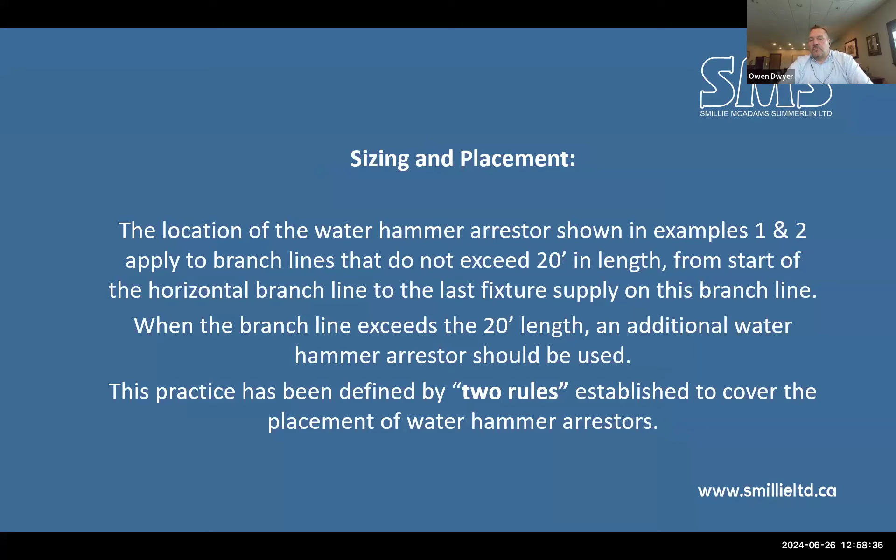So the location of the water hammer arrestor in examples 1 or 2 only applies to branch lines that do not exceed 20 feet in length. Those are the smaller lines that start from your horizontal branch line to the last fixture, not to exceed 20 feet. When the branch lines exceed 20 feet, you need to start adding additional water hammer arrestors. So there's the 2 rules that have been established in the placement of water hammer arrestors over the years.

That 2-rule system: rule number 1 covers multiple branches up to and not exceeding 20 feet. So if your branch line to your end fixture does not exceed 20 feet, 1 unit as prescribed by your fixture units, that size of device, put that in there, you're good to go. Different scenarios, different calculations. I'm not going to go through them all for the sake of time. Up to 20 feet, that's your direct translation, direct placement. Regardless, your fixture unit size quantity will change, and so will your water hammer arrestor, your line sizes, etc. But that's pretty much it for your example of rule number 1.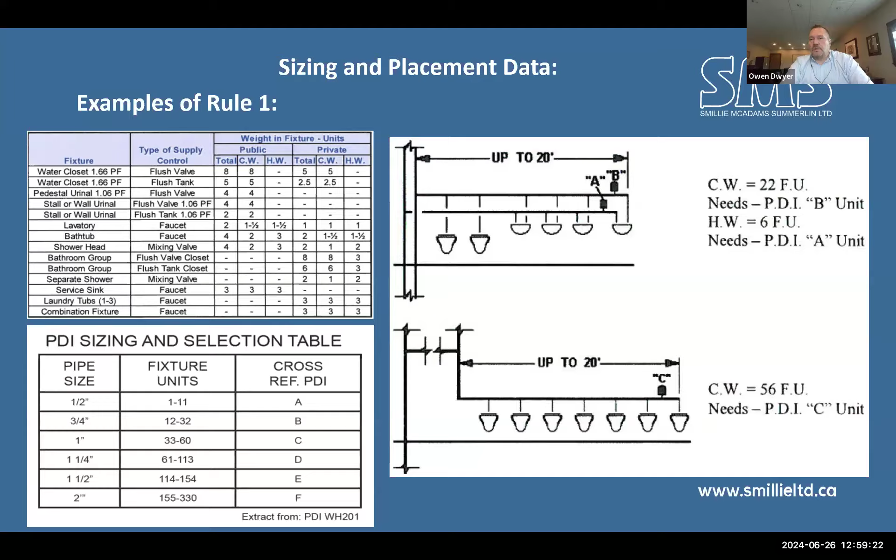Rule number 2 covers multiple branch lines which do exceed 20 feet. So anything that's above and beyond the 20-foot mark, you're going to have to start considering. You're going to have to add multiple arrestors. And in this scenario, you've got the top one, for example. My camera is covering, so I cannot see it. I'm going to cover that.

So you have the scenario where you've got your cold water lines totaling 44 fixture units, so that you're going to need two B-sized units for your cold water, and 12 fixture units, you're just going to use 2 A-size units. And where those go are, so again just to talk A and B here, 44 on the cold water side. If you come back over to here, 44 is going to be covered with 2 B's. So B plus B is 64.

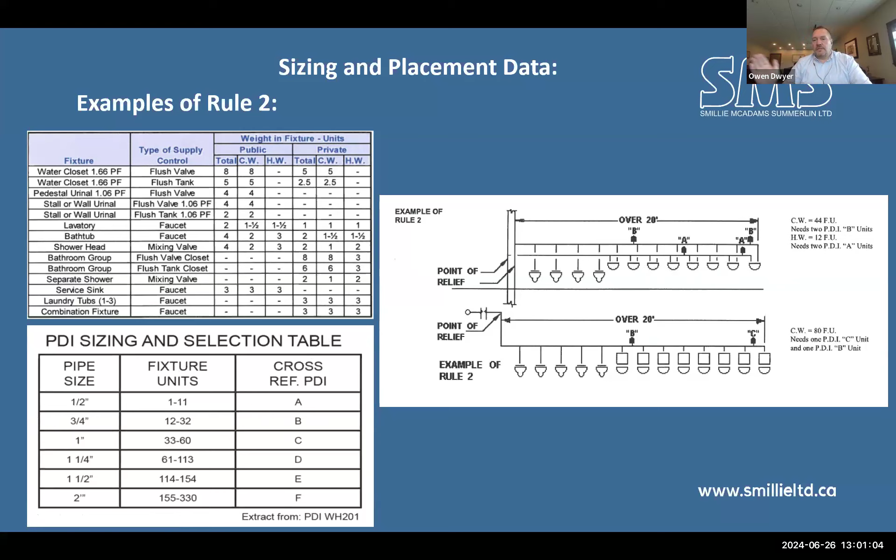Because it's the same line size, I need one at about the 20-foot mark and the other one at the end. Same with my A's, kind of split. You're splitting it up. So you can see here that there's 4 on the left, 4 on the right. First one in the center of those, and the last one at the end. You're just splitting up your units. So it's 12, even though 1 unit will cover 12 fixture units, give or take. Instead of putting 1 B in there, because it's longer than 20 feet, you're going to need 2 of them, and you're going to have to split up that water hammer protection, because remember that shock wave isn't stopping where you put your water hammer arrestor. It's going to continue down your piping system.

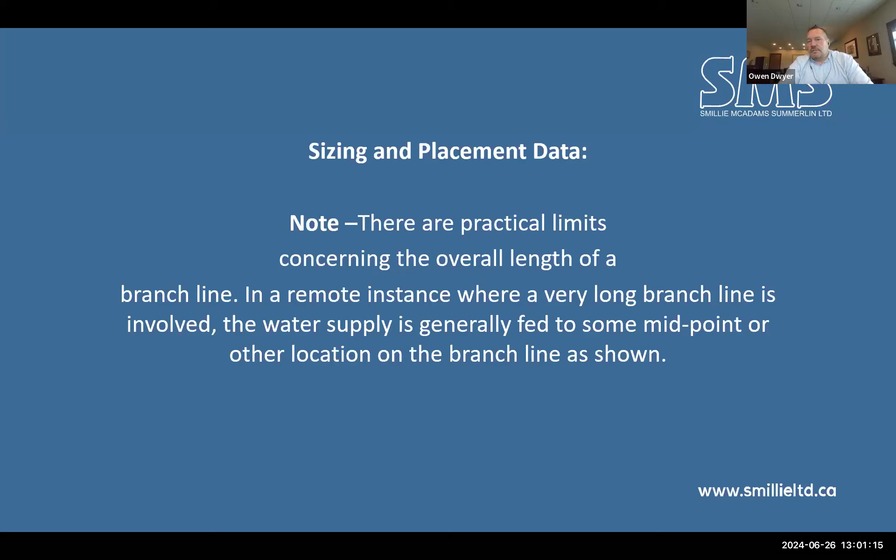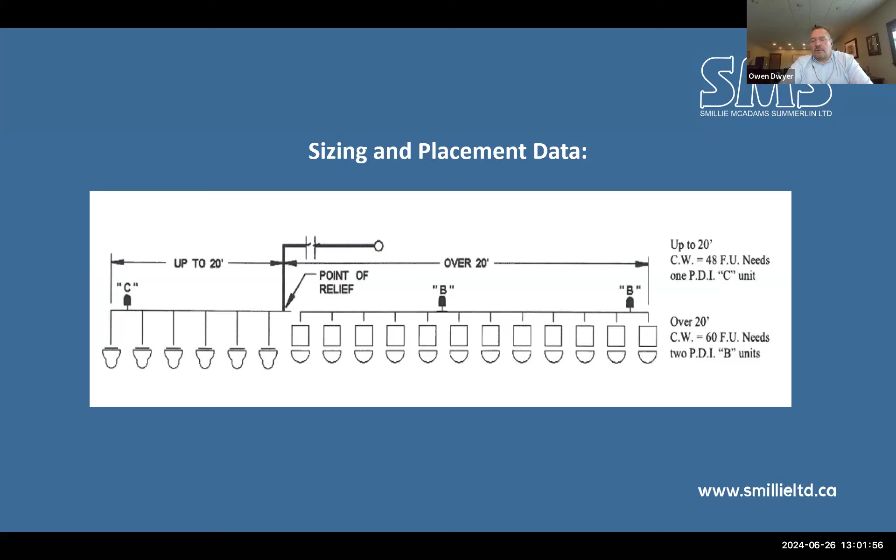So ideally, the flow pressure in the branch line servicing those fixtures doesn't exceed 55, so a pressure reducing valve should be installed to maintain that proper pressure within the system. However, when you do have instances where 65 to 85 psi is noted or is part of the system, then you have to upsize your water hammer arrestor, and you can refer to the following tables. Again, these are recommendations for sizing and placement of arrestors based on industry experience and recommendations through PDI. This is not coming directly from Oatey or PPP. This is based on PDI's experience over the years with respect to sizing and placement.

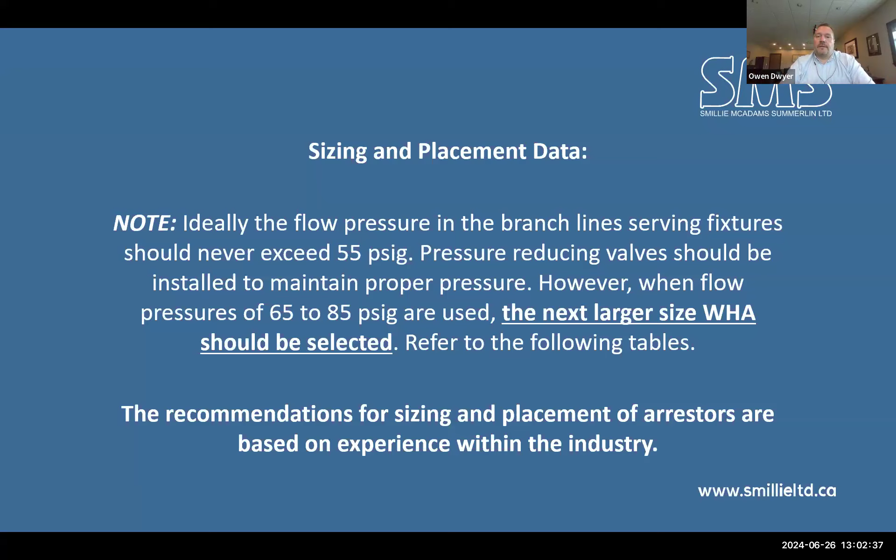And then you have 65 to 85 psi water hammer arrestors, and you can see from the previous chart, everything is just one water hammer arrestor size up. So you could see A's, top left AA, go to BB, that 1B at the 1 inch becomes a C, etc. So if your pressure is higher, you need to go to the next arrestor up.

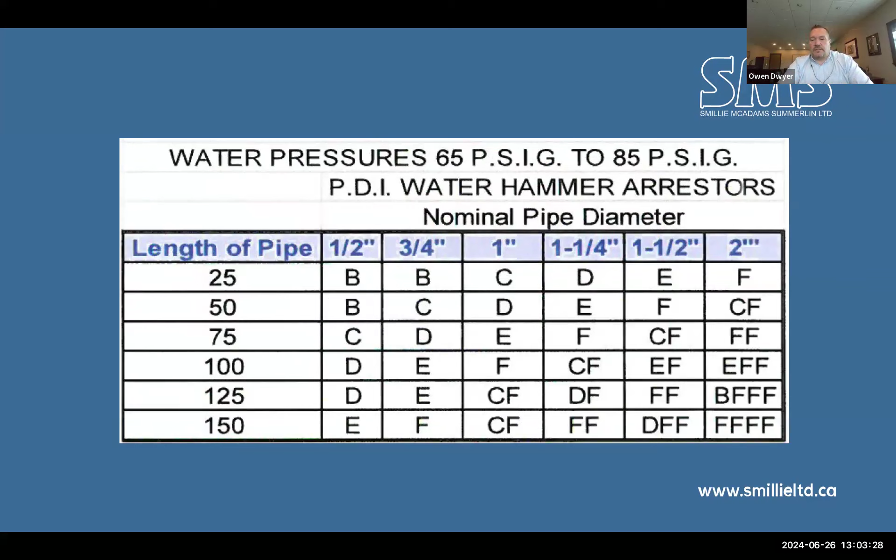So this is important to note. Defining the size and placement of the water hammer arrestors for a single fixture and equipment branch lines are illustrated in the following picture. So for sake of clarity, all the other bells and whistles have been removed.

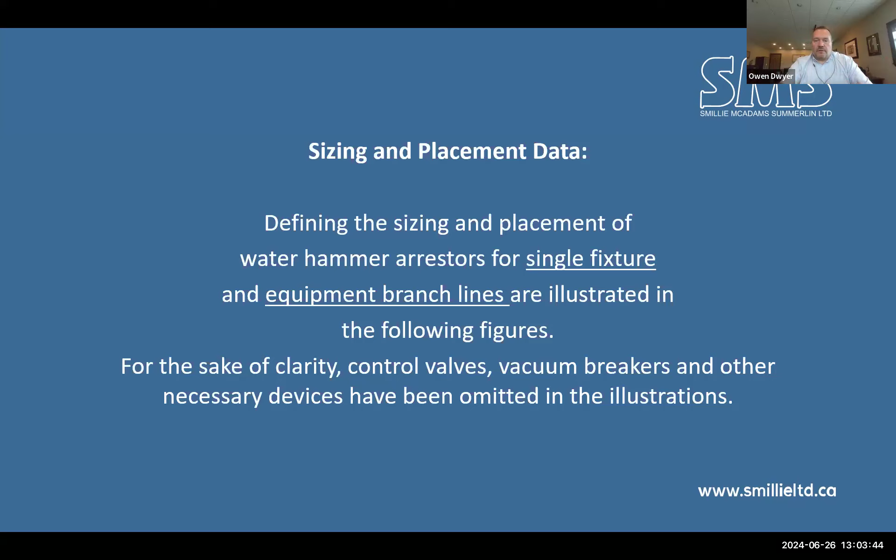So for example, a single line is different. The previous examples we saw where you had multiple branches. This is if you have a single branch and single source equipment water shock device, if you will.

You always want to place your water hammer arrestor as close to the source of shock as possible, be it the pump, be it the solenoid, etc. So you always want to try to put your water hammer arrestor as close as reasonably possible to the source of shock.

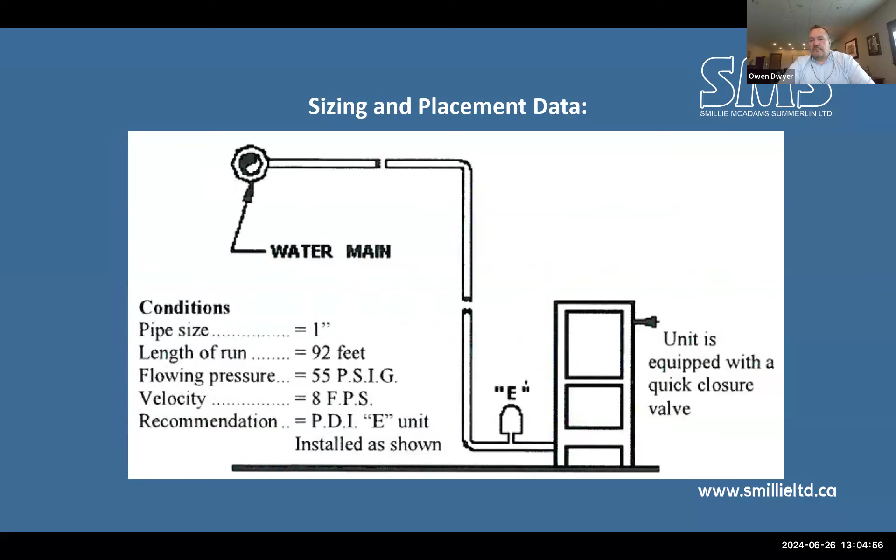So in that scenario, up to 65 psi, you can see that it was 92 feet, 1 inch line. So you have 92 feet, so let's go to the 100, and it was a 1 inch line. So you've got the E there. And so that's the size that you would choose and place it as close to that equipment with the quick closing valve as you could.

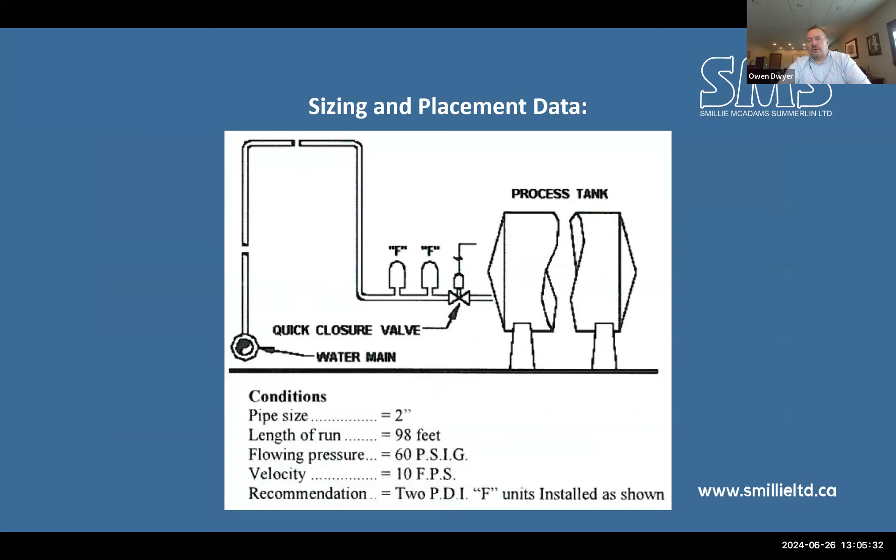Second example here, your pipeline sizing is 2 inch. You've got 98 feet. So again, your PSI is under that 65 PSI range, so you don't need to upsize. So 2 inch, 98 feet, 60 PSI. You're now looking at 2 F arrestors. So you would put 2 F designated arrestors there, and that's again based on that PDI chart of sizing of the arrestor.

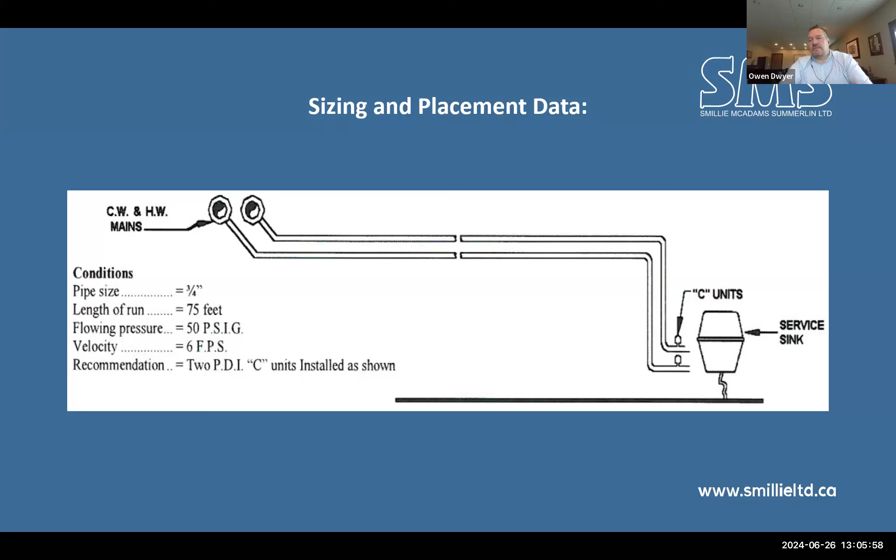Here's another example. So you've got 3/4 inch lines. You've got a cold water and a hot water. Each of them will require a separate line. And again, you've got 3/4, 75 feet, 50 PSI, and below that 65, I'm just going to put the C unit. And the biggest difference here, if this was 70 PSI, instead of a C, it would be a D designated unit, because you're going to go 1 size up if your pressures are higher.

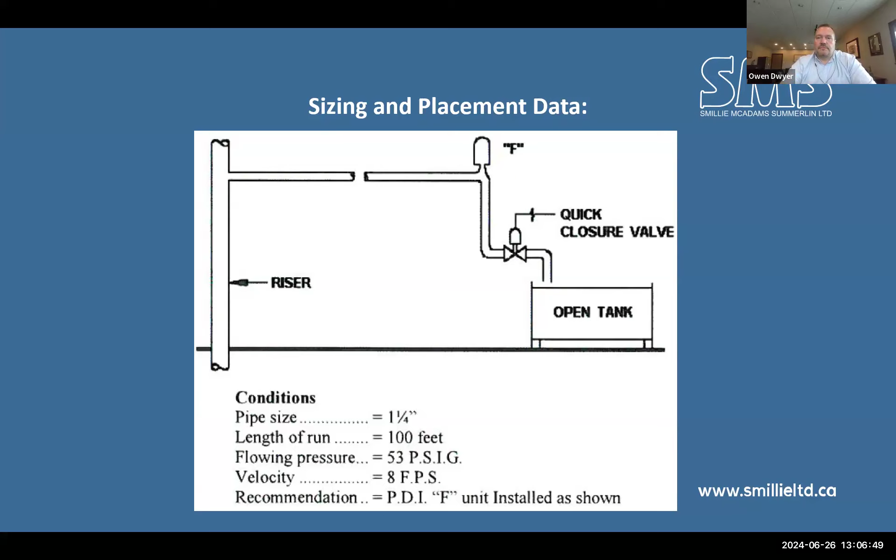So one thing to note before we open it up to questions, the maximum connection size. So what happens with a water hammer arrestor is the barrel size changes, but the maximum actual threaded or solvent weld or socket weld connection is 1 inch. So if you specified a 2-inch water hammer arrestor, it'll come as a 2-inch barrel sized appropriately for that shock wave, but the connection sizes are always 1 inch. So don't be shocked if you think somebody's supplying you with a 1-inch water hammer arrestor. It's actually 2. The size of the chamber and the air capacity is suitable for the 2-inch water line or for the 2-inch shock line, but the connection sizes max out at 1 unless you go to a flanged connection.

So I hope that makes sense. And again, this was kind of a quick flyover of concepts of water hammer arrestors. Every scenario was different. If you have any questions, by all means, if I can't answer it, I can always reach out to the engineers at PPP as well. But on that note, I appreciate everybody's time, and I do apologize for talking fast at the end there, but I had more material to cover in a shorter period of time.

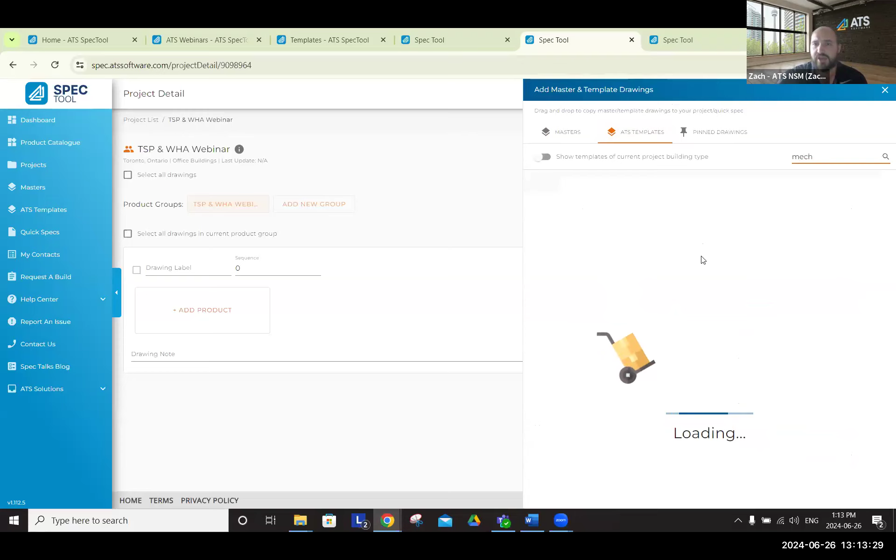If you want to use that mechanical room template we were talking about, you could search for mechanical, and you can see your mechanical room template Canada. If you had a master for the application, let's say you're doing a ton of barbershops, great, you could then find your barbershop.

In this case, I'm going to search for that same mechanical room template. And if I've got multiple product groups within this, then I can filter down. Let's do just our trap seal primer first. I'm simply going to drag these dots and drop it over here. Boom, I've selected from my approved master or from the ATS recommended template and copied over the product selection.

We talked about water hammer arrestors and how they protect pipes. But if this is a taller building, a different version of that is a pipe support. You might need pipe support. You might need a floor drain in your mechanical room. You might need another trap seal primer as well. If you've got a mop sink in that mechanical room, you might also need an eye wash, depending on what sort of cleaning chemicals you're using.

We were talking about backflow. You might need a backflow preventer for the zone isolation, and even point of entry water filtration. Not to mention your sump pumps that can be sized, or your water heaters that can be sized.

I can select these checked off boxes by taking this group here and dropping it over. I could also do the entire room and then drag everything over. One of the other great features is you can see I've got something here.